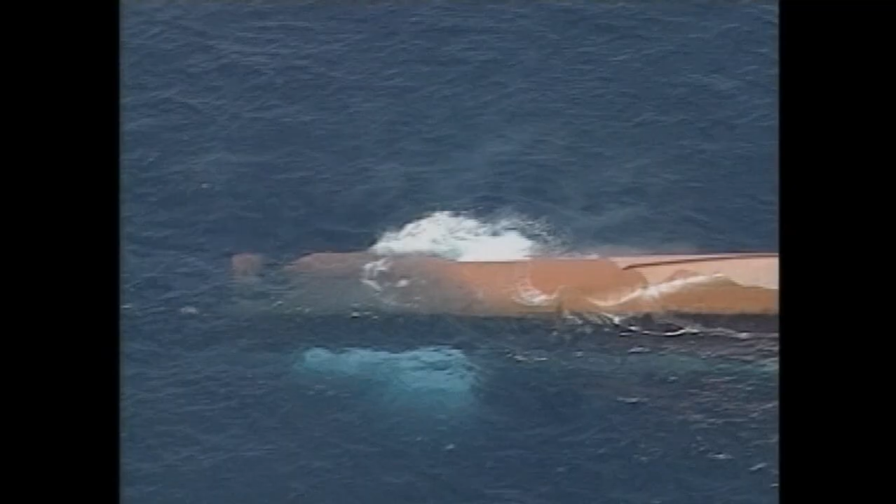The ship handling techniques that we are to study here are also available in the International Maritime Organization Circular Guidance to the Masters for Avoiding Dangerous Situations in Following and Quartering Seas.

According to the guidance, risks in following and quartering seas may arise when a ship is sailing in the same direction and at the same speed as the problem waves.

Let's take a close look at the effects of these seas upon a ship's stability. The situations that should be most carefully monitored in following and quartering seas, when the ship is traveling in the same direction and at the same speed as the problem waves, are the encounter wave grouping phenomena, parametric rolling, the reduction of stability, and the broaching to phenomenon.

These four serial phenomena are the characteristics of encounter wave grouping phenomena. First, let's take a look at encounter wave grouping phenomena.

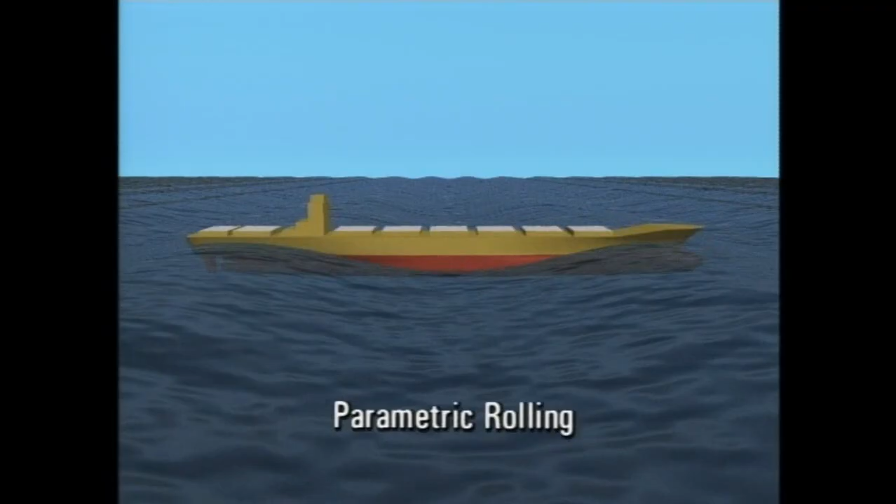However, when parametric rolling occurs, a ship rolls to the starboard side on the first crest and to the port side on the following crest, which means that one rolling cycle is completed for every 2 wave cycles. Consequently, the amplitude of the ship's roll is gradually magnified.

To understand this more easily, let us compare ordinary rolling and parametric rolling. When you look at these motions more closely, you will notice that the ship rolls only once for every 2 cycles of passing waves, while the ship pitches once synchronous to the cycle of passing waves. This type of rolling is magnified when the encounter wave period reaches half of the ship's natural rolling period.

This means that as GM decreases, the probability of parametric rolling increases.

In order to avoid parametric rolling, it is necessary to adjust the encounter wave period so that it does not coincide with 1/2 of the natural rolling period of the ship.

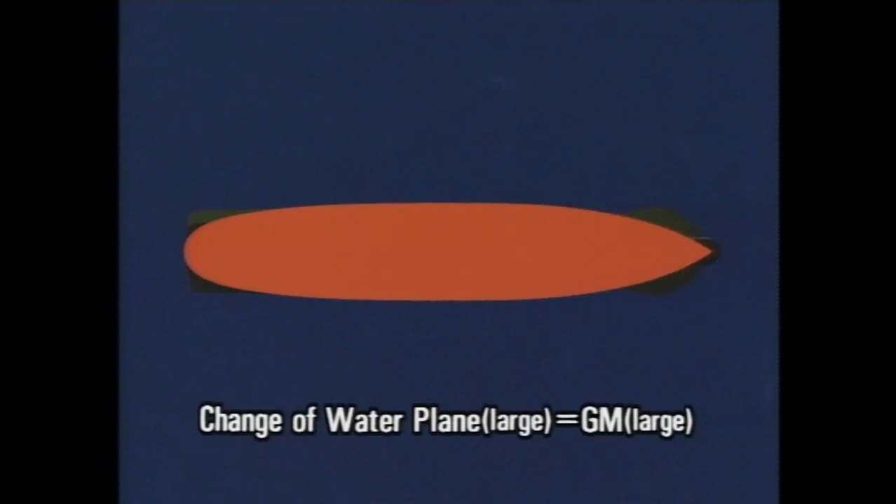Even if a ship is in a situation with reduced stability, the time span the ship might endure this will be shorter when sailing in counterseas. Conversely, the possibility of risk is increased in following and quartering seas, as the time span is greatly increased.

To avoid the risk of capsizing due to a reduction of stability, you need to have your ship sail clear of this dangerous zone to minimize the chances of riding on the crests of waves for a prolonged period. For this purpose, you also need to reduce the ship's speed or alter course, or do both, to change the encounter wave angle.

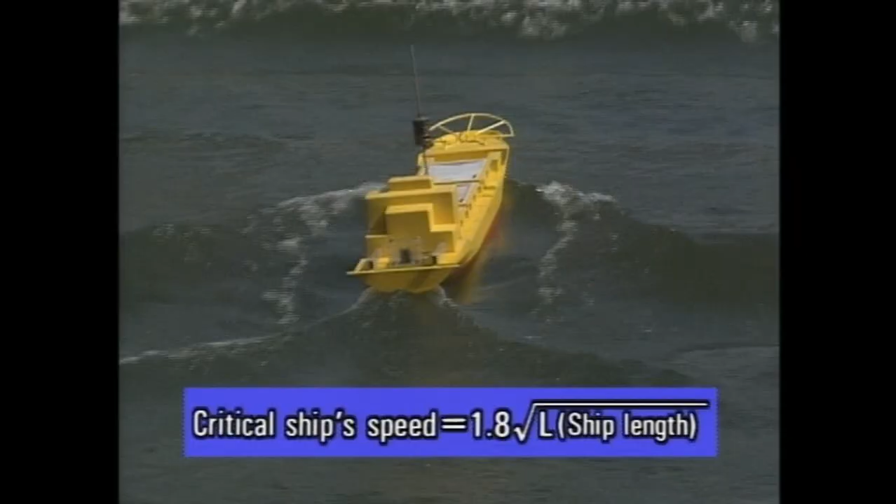To avoid surf riding, you should know the critical ship speed that causes this phenomenon. The critical speed that causes surf riding is considered to be 1.8 multiplied by root L. Therefore, you should reduce the ship's speed to less than 1.8 multiplied by root L.

In addition, even before reaching the surf riding condition, to avoid large surgings likely to induce the broaching to condition, it's necessary to reduce the ship's speed to less than 1.4 multiplied by root L. The formulae shown here are also cited as the criteria for avoiding broaching to in the guidance adopted by the IMO.

However, when a ship is sailing in shallow waters, a surf riding phenomenon can be caused even when a ship is sailing at a comparatively low speed. This should be borne in mind, in particular by seafarers operating high-speed pleasure boats and fishing vessels.

To prevent encounter wave grouping phenomena, it's necessary to take care so that any combination of important factors, such as encounter wave angle, ship speed and wave period, do not fall in the danger zone.

To prevent parametric rolling, it's necessary to take care so that the encounter wave period to the ship's natural rolling period ratio does not fall to half.

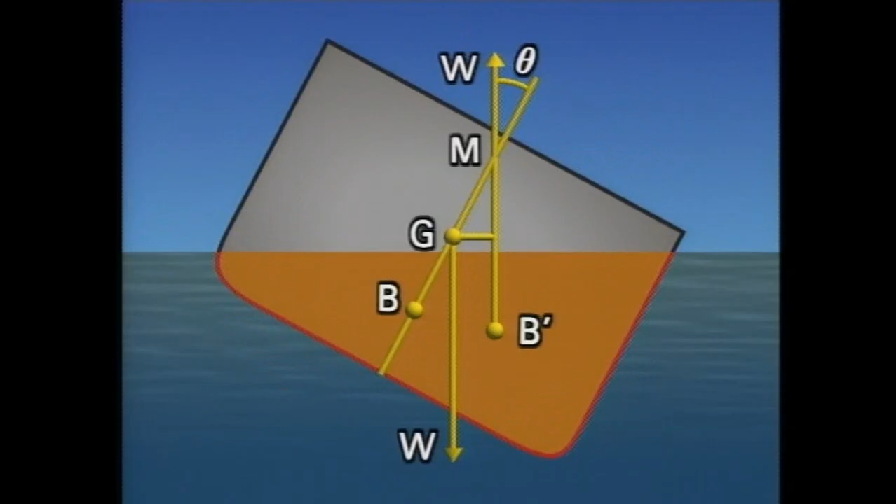To prevent surf riding and broaching to, it's necessary to be aware of the critical speed leading to surf riding conditions. In addition, take special precautions to prevent these phenomena when a ship is sailing in shallow waters. For seafarers operating pleasure boats, high-speed fishing vessels, small and medium-sized ships, this should be particularly borne in mind.

We hope this video helps to promote safe ship operations by reminding you to observe the basic ship handling requirements and by providing you with sufficient knowledge on the dangers of sailing in following and quartering seas.

When a ship navigates in head seas, its hull is subjected to severe shocks which induce violent ship motions. As well-trained and experienced navigators, we are able to respond to this by altering the ship's course and speed as required.

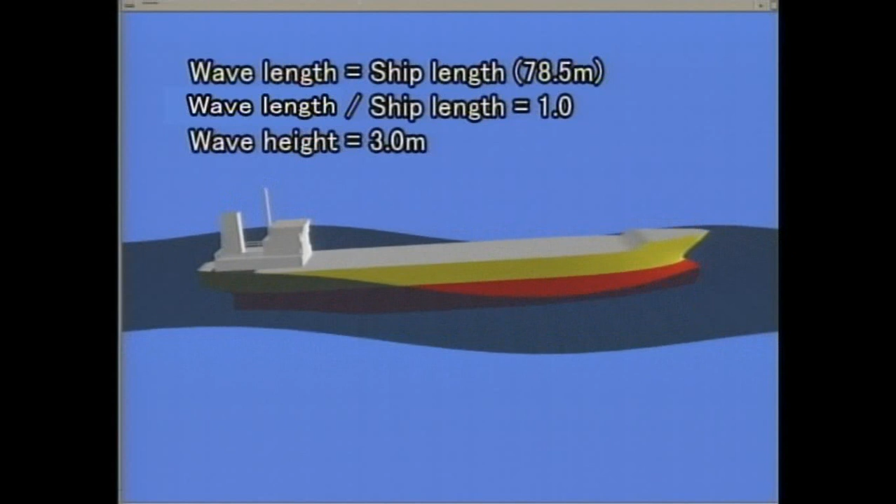When wavelength is equal to ship length, ship motions will be most intense. The heaving of the ship on a crest and the plunging of the bow into the succeeding wave will be accelerated. In such cases, changes of water level both forward and aft become particularly great in regular waves, and this causes propeller racing, shipping seas, and slamming phenomena.

Whenever a ship pitches and heaves heavily at the bow, an equivalent heaving motion is generated at the stern. Due to these motions, the stern lifts out of the sea at intervals, exposing part of the propeller and causing instant increases of propeller revolutions accompanied by intense vibrations due to the abrupt reduction of propeller load. This phenomenon is called propeller racing and can have adverse effects not only on the propeller itself but also on the propeller shaft and engine.

Therefore, we should make the stern draft as deep as possible so that the propeller immersion will be kept at more than 20% of the diameter of the propeller when navigating in rough seas.

As resistance to the hull increases, the ship sometimes plows through the water under excess engine load. This causes what is called a torque-rich effect, and may often result in engine trouble due to overheating or in great waste of fuel. In such conditions, it's essential to reduce ship speed.

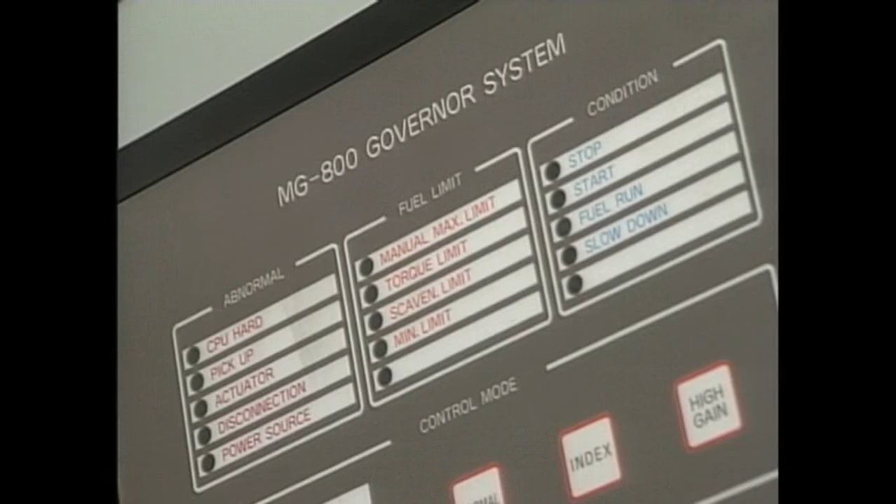Shipping seas is a condition in which a mass of green sea sweeps over the decks beyond the forecastle bulwark. A ship may sometimes suffer severe damage from the impacting green seas.

Deck machinery, deck cargo and hatch covers are often damaged by the seas thus shipped, and hatch cover damage can allow the entry of water into the holds.

These assaults by green seas have two effects: direct dynamic pressure from the shipped masses of green sea, and the ensuing damage caused by the impact of sweeping waves against deck machinery and appliances.

The dynamic pressure of green sea pounding on deck vertically may reach about twice that of shipped green seas. Furthermore, the dynamic stress of a sweeping mass of shipped seas over decks, increasing in proportion to the power of 2 of ship speed, becomes almost as great as that from vertical pounding.

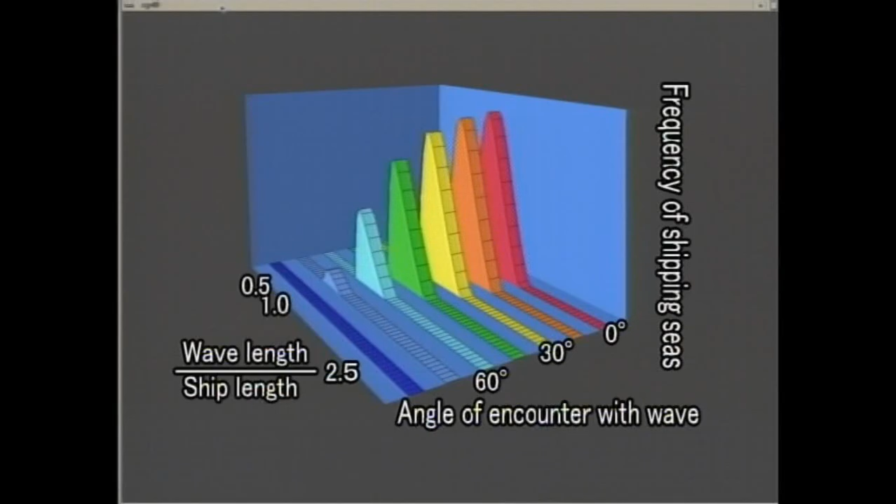As you have seen, shipping seas becomes more frequent when wavelength is equal to ship length in head and countering seas. We can decrease the chances of shipping seas by reducing speed or altering course.

Next, let's study the phenomena associated with shipping seas when there are irregular waves. Waves usually encountered in the ocean are a complex mixture with different lengths and heights.

Let's start the trial. In this case, the ship travels at a speed of 9 knots in head seas with an average wave period of 7.13 seconds and a wave height of 3.7 meters. Under these conditions, the action of the seas being shipped is violent.

Let's change the angle of encounter of the ship to waves to 60 degrees, while leaving the other factors unchanged. Under this condition, rolling increases, but no seas are shipped.

In summing up the results of these trials, it's clear that the frequency of seas being shipped increases in proportion to ship speed.

When a ship sails at a relatively high speed in head seas, slamming may occur. Slamming can be broken down into 3 categories.

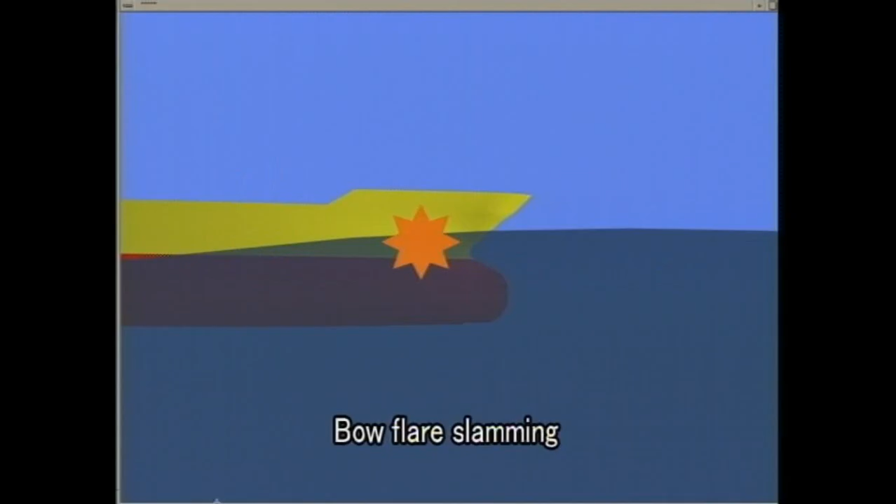Bow breaking wave impact is caused by breaking waves superimposed on built-up waves at the bow of a large, full-hull type ship in head seas.

These forms of slamming phenomena often not only cause structural damage to bow, bottom or bow flare, but also lead to major cargo damage.

As the frequency of slamming increases, there is the chance of cracks developing in the hull structure and of metal fatigue due to repeated stresses and strains, sometimes leading to a major casualty with a total collapse of the hull.

Here, in a model ship trial, we study what conditions cause slamming to be generated.

It appears that the frequency of slamming increases in proportion to ship speed. In addition, it's also clearly indicated that the frequency of slamming increases when forward draft is reduced. From this table, it's possible to calculate the necessary speed reduction to decrease the frequency of slamming by half.

Propeller racing, shipping seas on decks, or slamming may be generated when a ship navigates at a relatively high speed in head seas. We have studied the frequencies of shipping seas and slamming on various types of ship based on the correlation between ship speed and encounter angle of the ship to waves.

To avoid any critical situation, it's essential for the navigator to handle his ship by adjusting speed optimally based on correct knowledge of these environmental conditions, while taking his own ship's stability and maneuverability into consideration. A navigator's primary responsibility is to operate his ship safely in harmony with natural wind and wave conditions.

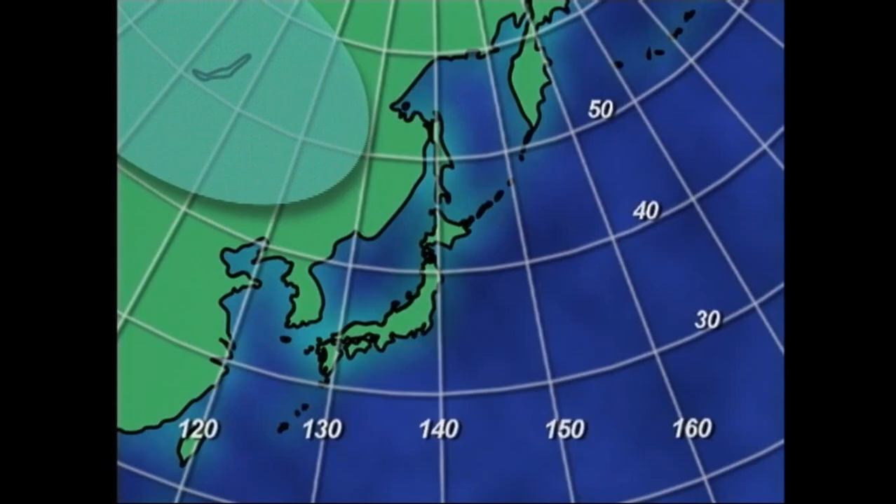The generation and development of an extratropical cyclone are greatly affected by air masses in the near-sea areas of Japan. There are two air masses affecting the meteorological condition in the near-sea areas of Japan. One is the Siberian air mass, a cold air mass. The other is the North Pacific air mass, a warm air mass. Depending on seasons, the Okhotsk air mass and the Yangtze air mass are also affected.

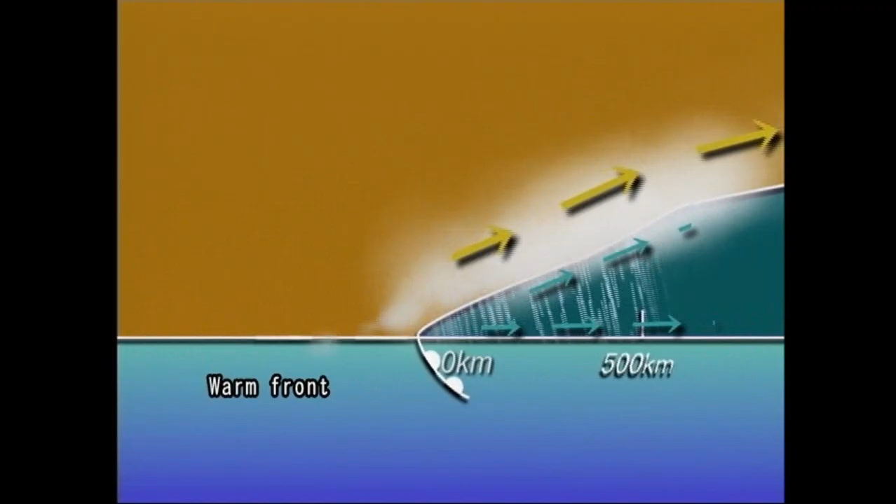When air masses with physically different characteristics come into contact with each other, fronts are created in the frontal boundary zone. When a warm air mass is predominant, it moves towards the cold air mass and pushes the front forward, with the lighter warm air creeping up the frontal boundary of the cold air mass. A front formed in this manner is called a warm front.

Conversely, when a cold air mass is predominant, it moves towards a warm air mass, and the cold air mass moves the frontal boundary forward, raising the lighter warm air mass. A front formed in this manner is called a cold front. An extratropical cyclone generates on this front.

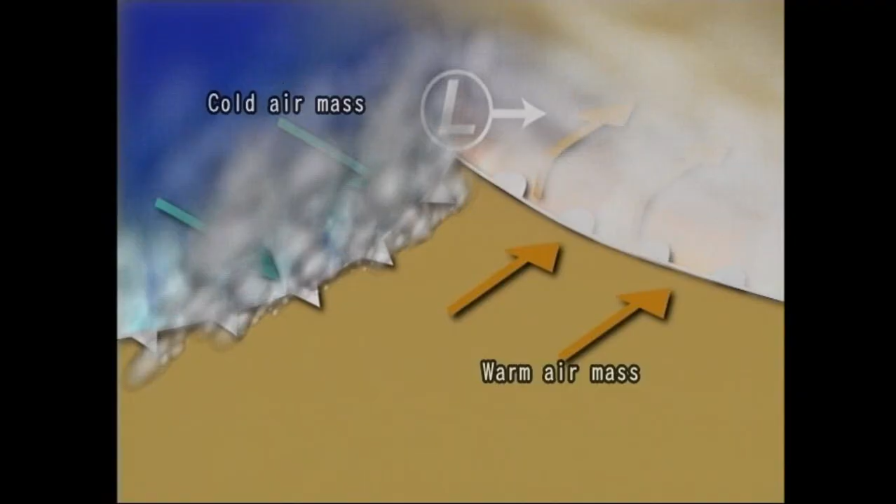If the warm air mass in the south of the front moves northward, and the cold air mass in the north of the front moves southward, an updraft occurs due to the contact between warm and cold air masses. This generates a counterclockwise spiral flow of air, growing into an extratropical cyclone.

The larger the difference in temperatures between the two air masses in the north and south, the larger the extratropical cyclone. For these reasons, larger extratropical cyclones develop in winter than in summer. Extratropical cyclones generally move northeast, approximately at a speed of 40 kilometers an hour, and 10 degrees in longitude a day.

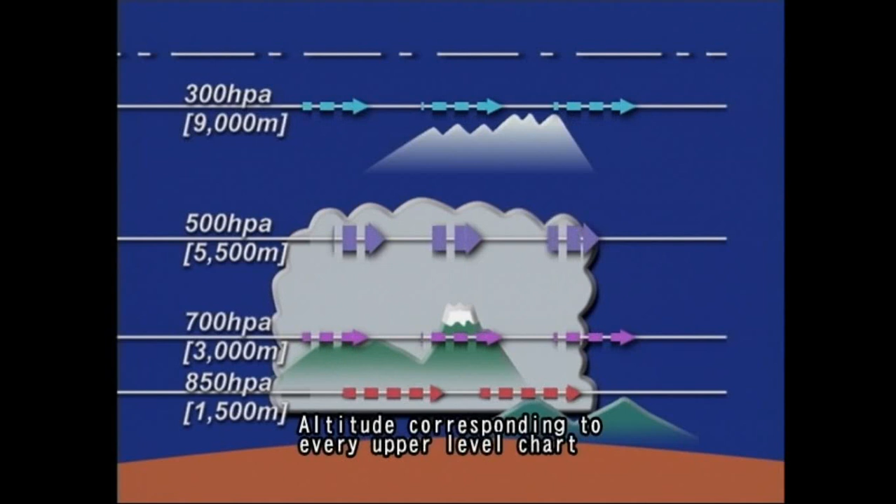Ships mainly refer to 500 hectopascal upper level charts. This is because levels of 500 hectopascals correspond to approximately half the average height of the troposphere, and its atmospheric pressure is about half that of the ground surface.

These extratropical cyclones tend to generate in front of a trough in the upper level. When a trough deepens from the day before, a low develops on the surface below.

We also need to keep an eye on the movements of upper-level isotherms, because movements of upper-level cold air towards the south may cause extratropical cyclones to develop associated with gusts. Special attention should be paid to the movements of isotherms on 500 hectopascal upper-level charts: minus 30 degrees centigrade and minus 36 degrees centigrade in winter, and minus 24 degrees centigrade in spring and autumn.

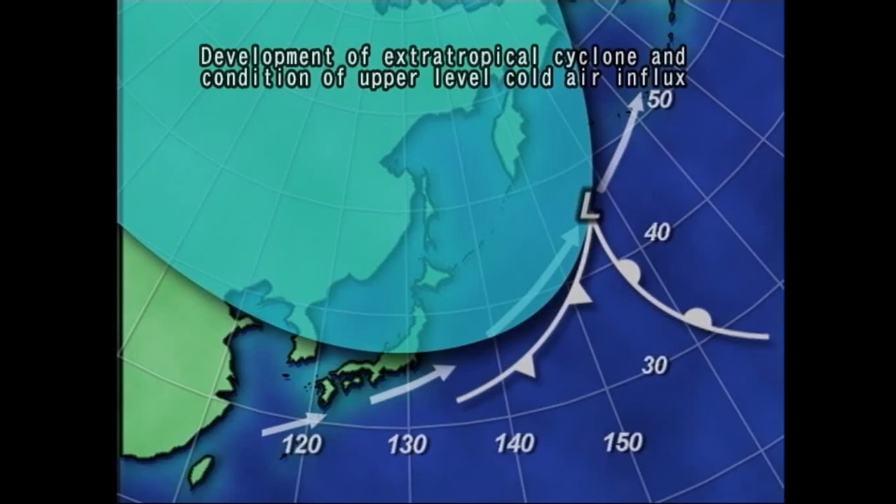As already explained, it's recommended that navigators should use upper-level and surface charts in an optimum combination.

Lows generated in a tropical zone are called tropical depressions. In Japan, a tropical depression with a maximum wind speed of 17.2 meters per second or more is called a typhoon.

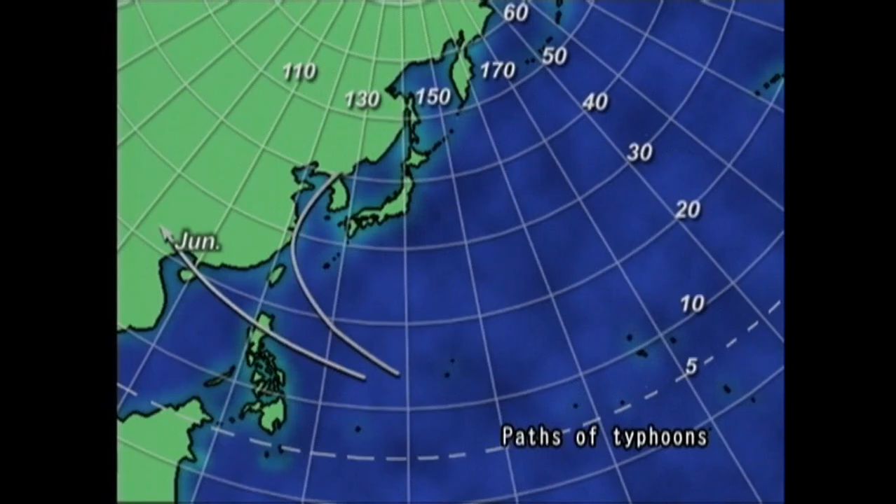Paths of typhoons generally come in two types: those traveling northwest after birth, and those recurving rightwards along the western fringe of the North Pacific Ocean high, then traveling northeast, influenced by westerlies. The path of the right-turn type is largely dependent on the strength of westerlies and the North Pacific Ocean high.

Most typhoons at first tend to advance west, bearing on the North Pacific Ocean high in the 500 hectopascal upper-level chart at its right side, along the 5,820 meter or 5,860 meter contour. Recurving points of typhoons may vary corresponding to the pattern of the ridge of atmospheric pressure of the North Pacific high extending east to west.

Let's take a look at a few days of movements of one typical developing extratropical cyclone in the near-sea areas of Japan in detail, referring to related surface charts.

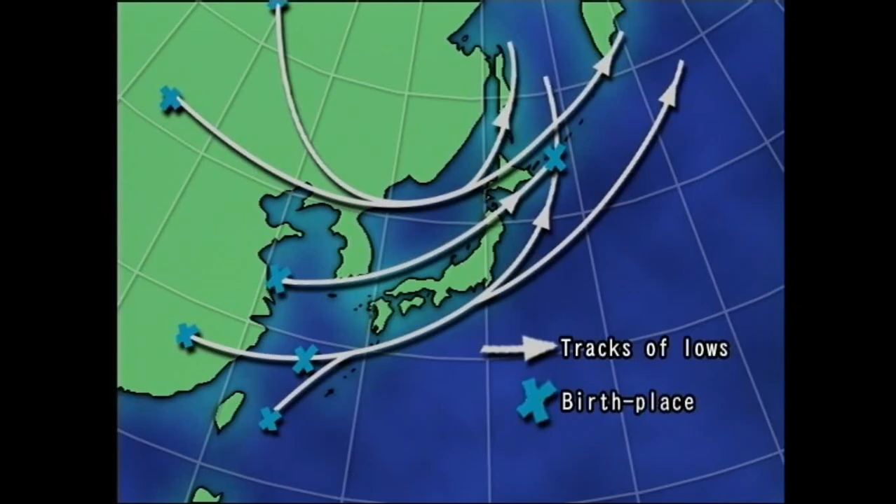In the near-sea areas of Japan, many extratropical lows generate from autumn to spring, and sometimes they develop to levels comparable to typhoons. They are categorized into three patterns corresponding to their origins and ensuing tracks: East China Sea lows, Japan Sea lows, and twin lows.

After the low has moved east under the influence of these three weather phenomena, a typical pressure pattern of highs in the west and lows in the east is often established. Let's take a look at such a typical pressure configuration.

A typical winter pressure configuration of highs in the west and lows in the east, as shown in this surface chart, appears from November to March. When the continental high extends to cover Japan and a developed low exists in the northeast area of Japan in the North Pacific, the winter monsoon grows stronger and lasts longer.

In the areas east of Nojimasaki of Japan, marine casualties involving large ships have often occurred due to high waves caused by the winter monsoon, which lasts for a long time with long fetches over the sea surface.

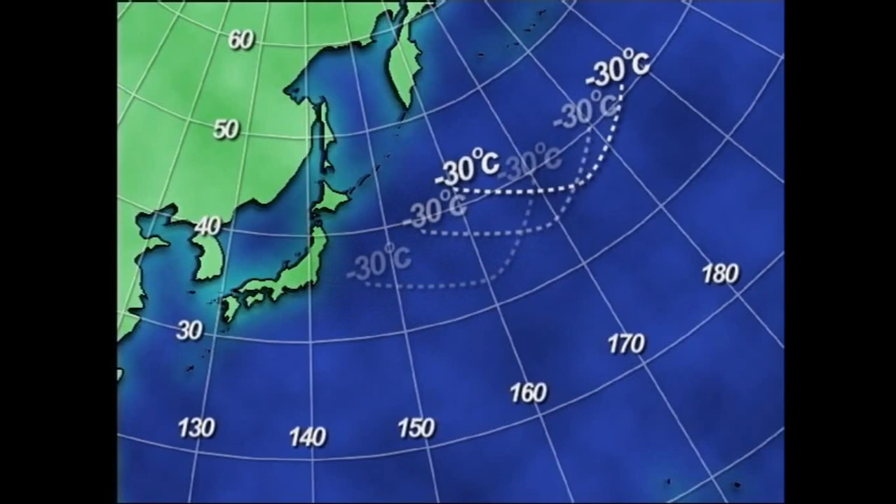This is why unusually high waves generate over a wide area. This high wave area extends 30 to 37 degrees north in latitude and 140 to 160 degrees east in longitude.

As this high wave area appears in the southwest quadrant, far from the center of the low, it's necessary to know the movements of upper layer cold air from the isotherms of 500 hectopascal upper level charts.

It's necessary to know the relative position of a ship to the subject tropical depression or typhoon to minimize its effects.

When a typhoon is moving north and wind direction observed on board changes clockwise, the ship is in the right semicircle of a typhoon. In contrast, if the wind direction changes counterclockwise, the ship is in the left semicircle of a typhoon.

The rate of change of wind direction is larger when the distance between the ship and the typhoon is smaller. Conversely, the change becomes smaller when the distance increases. A large change foretells abrupt and drastic directional change of wind direction.

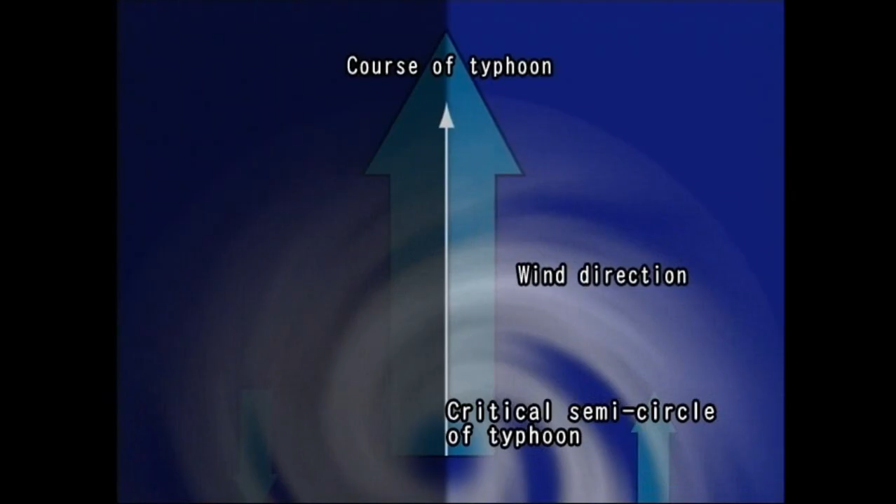The semicircle to the right of the center line of the typhoon's path is called the critical semicircle, where the original winds of the typhoon are enhanced by the same directional prime mover air current. If a ship is in this semicircle, it will endure a pressing wind towards the center.

On the other hand, the left semicircle of the advancing path of the typhoon is called a navigable semicircle because typhoon winds are weakened by the adverse prime mover current of the typhoon. When a ship is in the left semicircle, the wind presses the ship behind the typhoon. Nonetheless, even in a navigable semicircle, as it accompanies a storm area, proper caution is necessary.

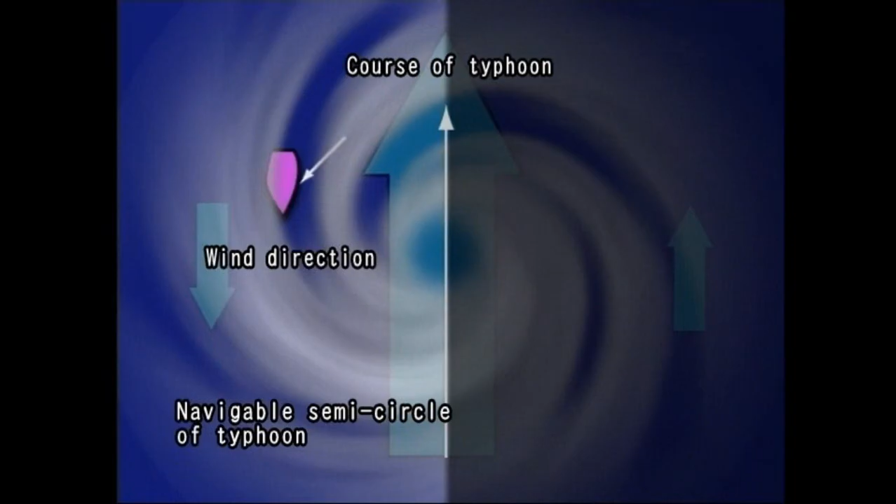Therefore, it is advised that the course is maintained to keep the wind at the starboard bow when in a critical semicircle, and at the starboard quarter when in the left semicircle, to turn away from the typhoon.

Today, we can easily receive various maritime meteorological information such as surface charts, upper-level charts, ocean wave charts, and photos taken by meteorological satellites broadcast by the Meteorological Agency.

It's important for seafarers not only to endeavour to acquire the necessary knowledge to make best use of this information, but also to have safe and cost-effective shipping operations.

Narrow passages and fairways in rivers and canals, where the navigable depth or width is comparatively small in relation to the draft and the breadth of transiting ships, are called restricted waters.

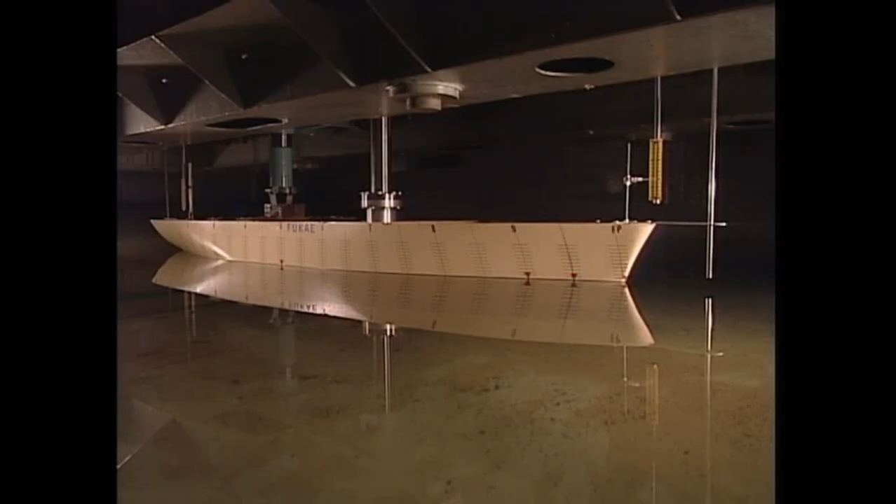The Froude number is an essential concept for a model tank test. To run a model at a speed corresponding exactly to that of a real ship, a ship speed is applied using this equation, which gives the same Froude number to different model lengths and the comparable real ships.

Here you see a ship in a tank test. Let's take a look at the sinkage of the ship at her bow and stern. Let's also look at the subsequent trim change running in deep water by using a ship model in a tank test. This is the bow of a fully loaded small ship running in deep water, where the ratio of the depth to the ship's draft is 5.0 at 11 knots.

This shows the condition of the stern of the same ship running at 11 knots.

This is the bow condition when the ship's speed is increased to 13 knots. This shows the condition of the stern of the same ship at a ship speed of 13 knots.

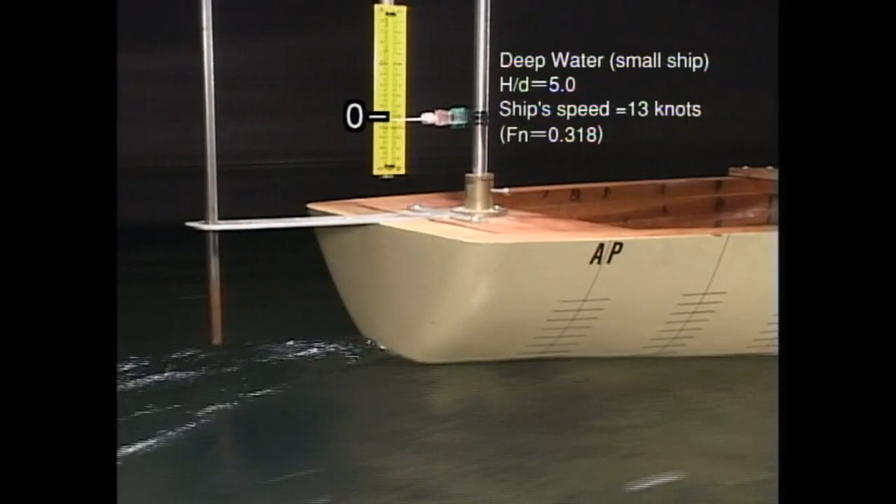However, the sinkage at the stern of a merchant ship under normal speed is generally very small. By contrast, the sinkage at the bow appears larger compared with that at the stern. As you see here, a ship underway tends to show trim by the head.

This is the stern condition at a speed of 9 knots. This is the bow condition when speed is increased to 10 knots without changing any other conditions. This is the stern condition at a speed of 10 knots. As you can see, the sinkage appears larger at both bow and stern in shallow water.

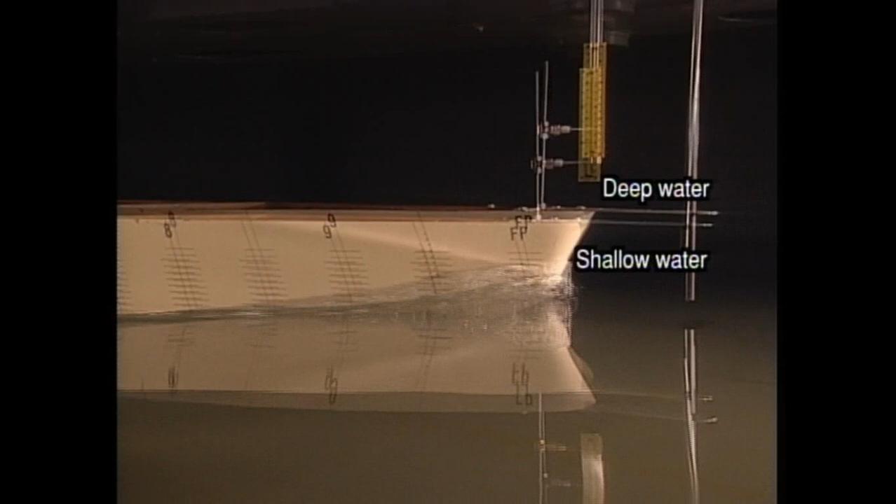Now we shall see how sinkage changes depending on the speed when a ship proceeds in shallow water. For ship speed with a corresponding Froude number less than 0.25, sinkage at the bow is greater than that at the stern as the Froude number increases. However, sinkage at the bow stops suddenly, and that at the stern finally increases when changing trim by the stern as the Froude number approaches 0.25, which is close to the values in high-speed areas.

We shall see this effect in shallow water and that in deep water. Sinkage at the bow in shallow water, which reaches 2% of the length of a ship, is larger than that in deep water.

So, why do these phenomena happen?

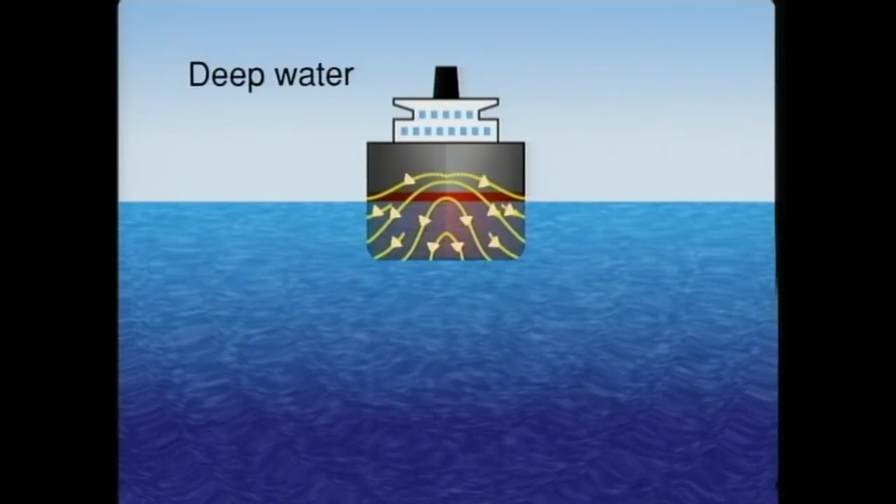In shallow water, where the bottom clearance is comparatively small, the ratio of the horizontal flow along both sides of the ship increases because the current towards the bottom is restricted. The hydraulic pressure along both sides of the hull decreases, as the nearer the hull is to the surface flow, the faster the rate accelerates, and the water level around the ship drops considerably. For this reason, sinkage at the bow and stern and subsequent trim change become larger in shallow water than in deep water.

We should be careful that sinkage at the bow and change of trim become greater when a ship runs in shallow water.

Now we shall see how the depth of water affects a ship's turning capability in shallow water. Let's take a look at the data of the turning capabilities of large ships. Every curve indicates the tactical diameter of a specific ship by the multiples of the ship's length.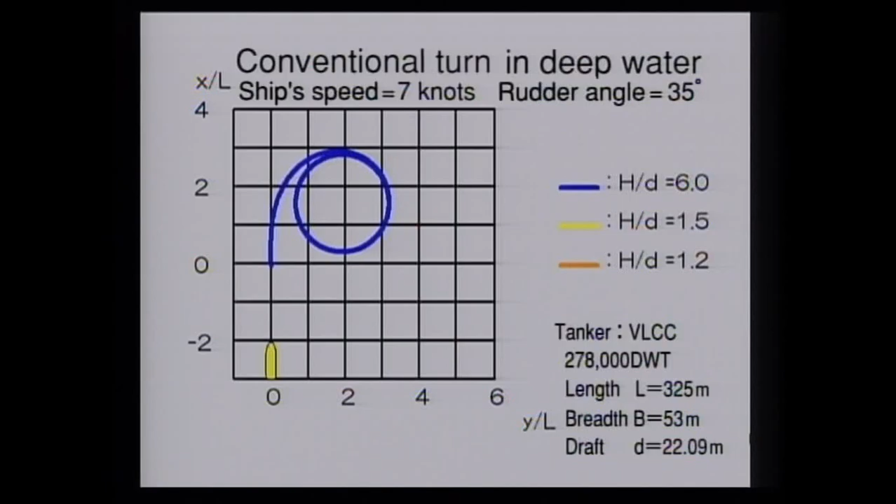This is a ship turning in shallow water, where the ratio of water depth to draft is changed to 1.5, while the other conditions remained unchanged.

This is when the ratio of water depth to draft is changed to 1.2 without changing any other conditions.

Now we shall see how the turning track differs as the depth of water changes. When the ratio of water depth to draft is 6.0, the turning tracks are as seen here. This is a conventional turn. Here is an accelerating turn. This is a coasting turn.

When the ratio of water depth to draft is 1.5, the turning tracks are as seen here. This is a conventional turn, here is an accelerating turn, and this is a coasting turn.

When the ratio of water depth to draft is 1.2, the turning tracks are as seen here. This is a conventional turn, here is an accelerating turn, and this is a coasting turn.

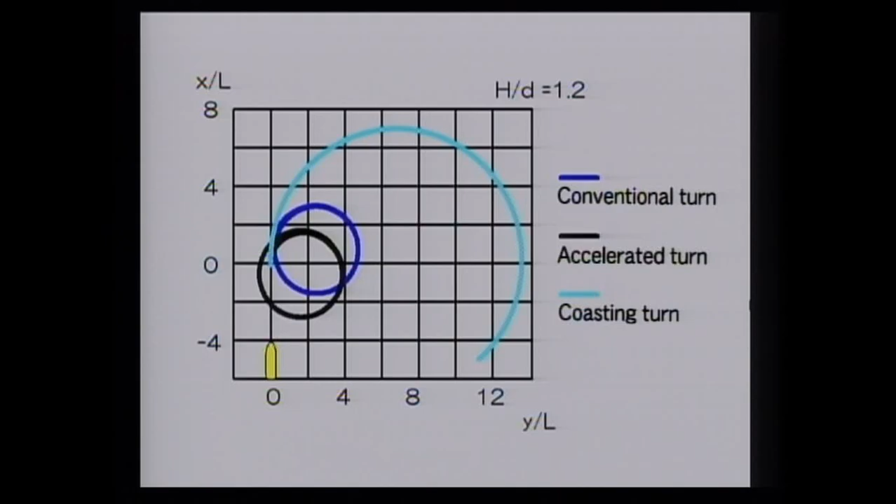Thus, we can estimate the tactical diameter of a ship running in restricted water as the multiples of its length. Although the presented data hitherto are taken from the test results of large ships, this method can also be applied to smaller ships.

In view of the maneuverability of a ship, the depth of water also affects course stability, like the effects on turning ability. We shall study the difference of the effects on course stability in deep water and in shallow water from the results of zigzag maneuver tests.

In the zigzag maneuver test, a ship's rudder starts to swing alternately to port and starboard when the ship is set on a steady straight course. At first, the rudder is put to starboard 10 degrees until her head swings starboard 10 degrees from her original course. Immediately after the ship's head swings 10 degrees starboard, the rudder is changed to port 10 degrees until her head points 10 degrees port from her original course. These alternate rudder operations are repeated several times, making a ship run in a zigzag course.

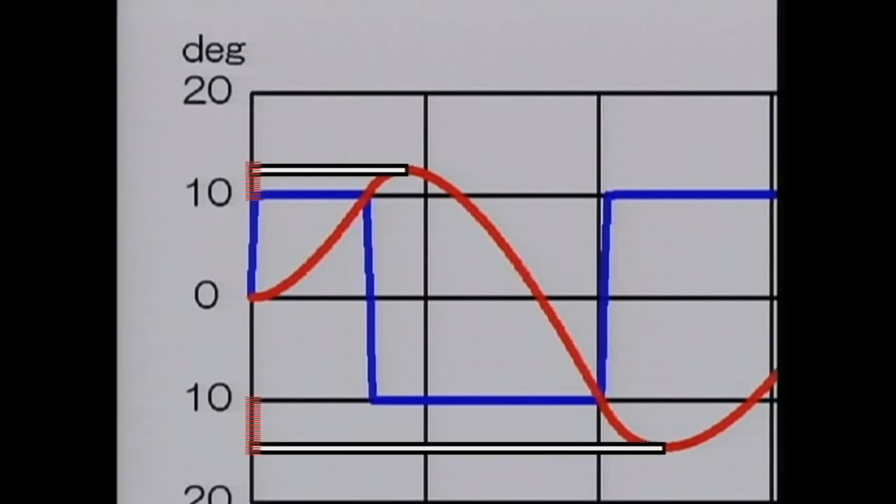Here you see the results of Z tests conducted in deep and shallow water. As you see, the required time to turn a ship's head port or starboard to a settled angle in shallow water becomes shorter with a smaller overshoot angle than that in deep water. This means that we can expect quicker rudder effect in shallow water compared to that in deep water.

A well-remembered case among several cases reported in the past is that of a large passenger ship navigating in shallow water without reducing her speed that hit her bottom severely on the rocks. When running in restricted water, it's essential to keep enough under-keel clearance to avoid the deterioration of maneuverability and touch-bottom damage.

Under-keel clearance means the space between the ship's bottom and the seabed. It equals the value when the ship's draft is subtracted from the sum of chart datum and height of tide at that time.

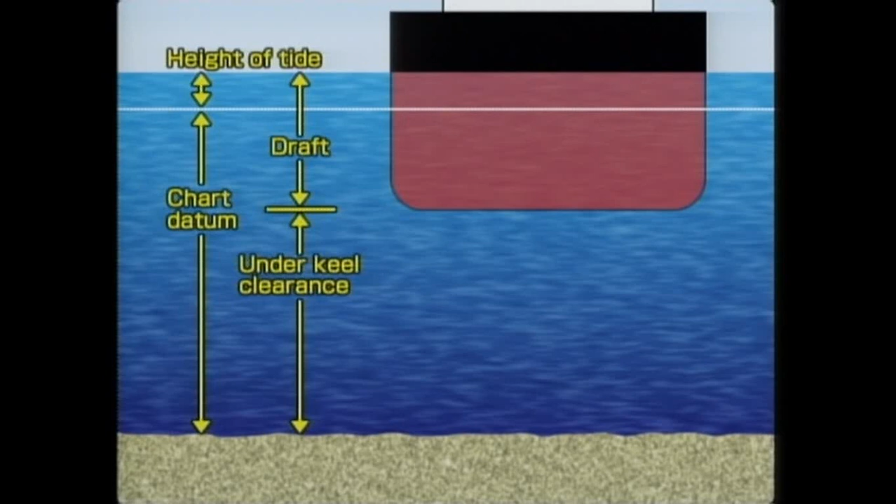To maintain enough under-keel clearance, we have to consider the factors affecting the sinkage of the hull, such as squat allowance, wave response allowance, possible error of chart datum, meteorological and oceanographic conditions, and other environmental conditions, and secure a safety allowance that eliminates ship handling difficulties.

As we have studied in this video, the effects of sinkage and change of trim when a ship navigates in shallow water greatly affect the ship's maneuverability. Enough knowledge of these effects in restricted waters will prevent accidents.

In January 1934, the British battleship Nelson left Portsmouth for the open sea at 9 knots and went aground on a starboard shoal in a narrow channel due to the unexpected ship's response of swinging her head to starboard, despite the helm being turned to port 15 degrees for the intended course. The reason for this grounding was a typical bank effect.

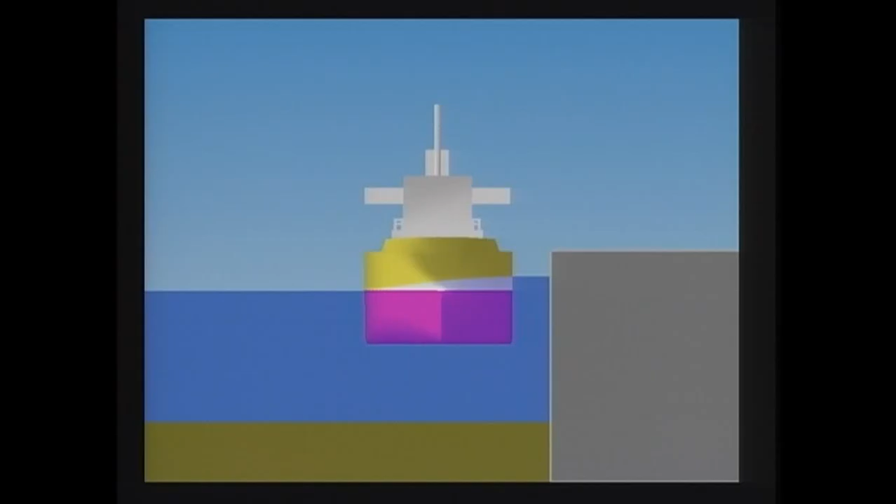The bank effect is a phenomenon that causes a bow outward moment and attracts the ship's hull as a whole to the bank due to decreased pressure at the midship area. This attracting force is called suction.

Ship handling becomes very tricky due to the deterioration of course stability caused by the bank effect when a ship navigates a narrow channel, as we've illustrated. How should we handle a ship under such conditions?

To have a ship run in a straight line on its intended course by offsetting suction and bow outward moment caused by the bank effect, the ship's head has to be kept obliquely to its intended course. As a result of this oblique posture to the advancing direction, extra force and turning moment will be generated on the hull. This extra force will offset suction to the bank.

However, to offset bow outward moment, a checking rudder motion toward the bank is still required. This means that the turning moment and the force produced by the proper angle of checking rudder can offset the forces and turning moments generated by bank effect and oblique posture.

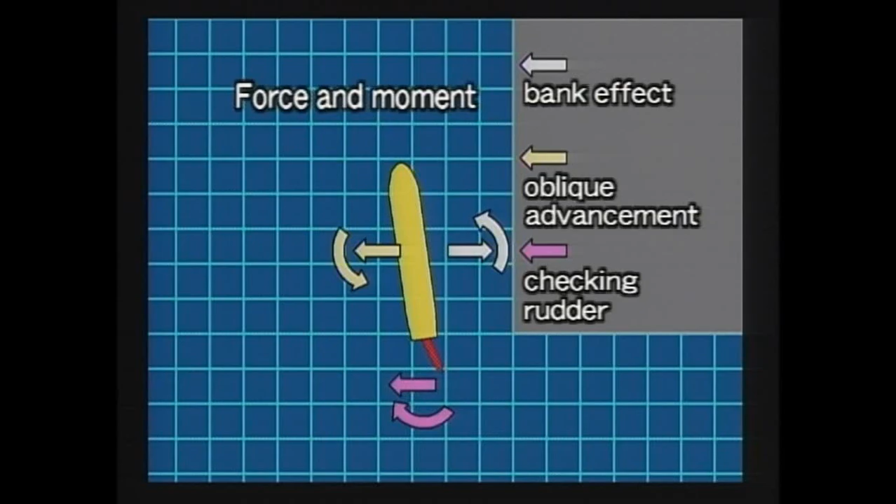To prevent contact with the bank at the stern, it is necessary for a ship to steer toward the bank. The ship can then maintain a parallel track to the bank.

When there are multiple ships passing by, running abreast or overtaking in a narrow channel, the interaction between two ships moving in close proximity will sometimes have a grave effect on those ships. The effect of the interaction varies depending on the relative positions of the two ships.

First, we look at the case of two ships of almost the same size passing each other. When the bows of the two ships come closer within the mutual hydrodynamic range, a strong repulsive force at the midships and bow outward moment are created.

Alternatively, strong suction at the midships and bow inward moment are produced between two ships when they come abeam of each other.

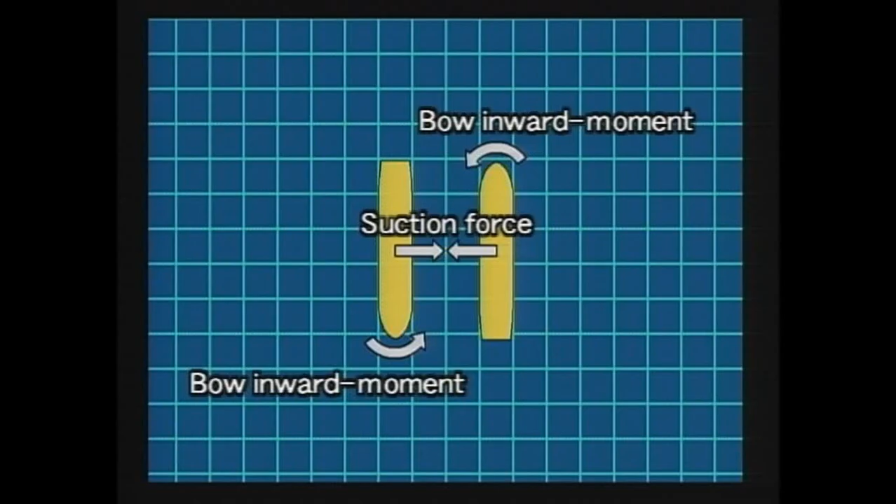When the sterns of the two ships pass each other, these effects are transformed into repulsive force and bow inward moment.

These effects of extra force and moment fade away quickly as the distance between the two ships increases. The results comparing the effects of interaction at 4 knots with those at 6 knots demonstrate that the interaction between two ships passing becomes larger and persists proportionally to ship speed.

When two ships pass by in the opposite direction, a collision seldom happens because the influences of repulsion and suction last for a comparatively short time. However, it should be borne in mind that the risk of contact at the stern will increase if either of them should turn its rudder in the wrong direction inadvertently.

The interaction between two ships of almost the same size running abreast in the same direction or overtaking in a narrow channel also varies depending on their relative positions. In this case, the risks of rear-end collision and contact increase because the interaction between the two ships lasts for longer.

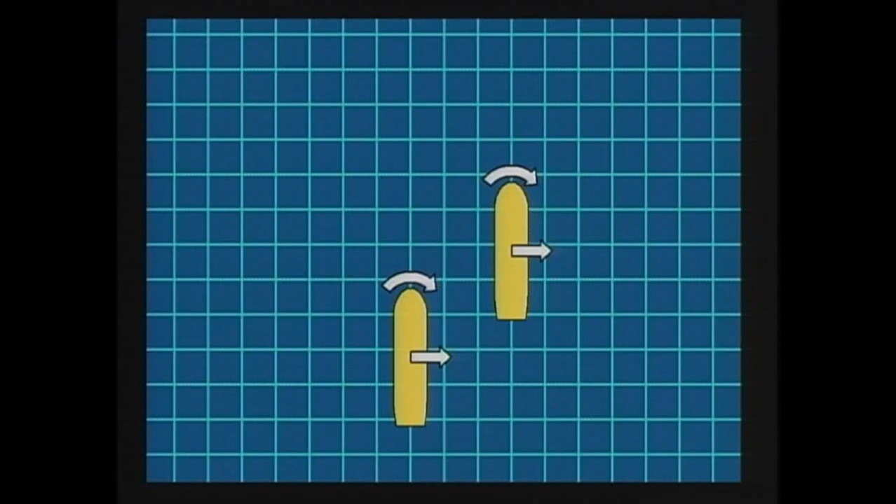When ship A advances 1/3 to 1/4 of its length from the stern of ship B in parallel, the effects change like this.

When two ships run abreast, strong suction at the midships and bow outward moments are generated between them.

The effects will be like this when the bow of ship A advances ahead of ship B, but 1/3 to 1/4 of their hulls remain parallel.

The effect will be like this when the stern of overtaking ship A comes abeam of the bow of ship B.

Let's look at how the interaction between two ships in close proximity and running in the same direction in a narrow channel affects the steerability of a ship through a simulation.

This is the case in which ship A overtakes ship B in a narrow straight channel with a width of 310 meters. The two ships are similar, and these figures represent the specifications of ship B. Ship A runs at 4.5 knots and ship B runs at 3 knots. The beam distance between the two ships is half of the ship length. The two ships are steered to maintain parallel courses.

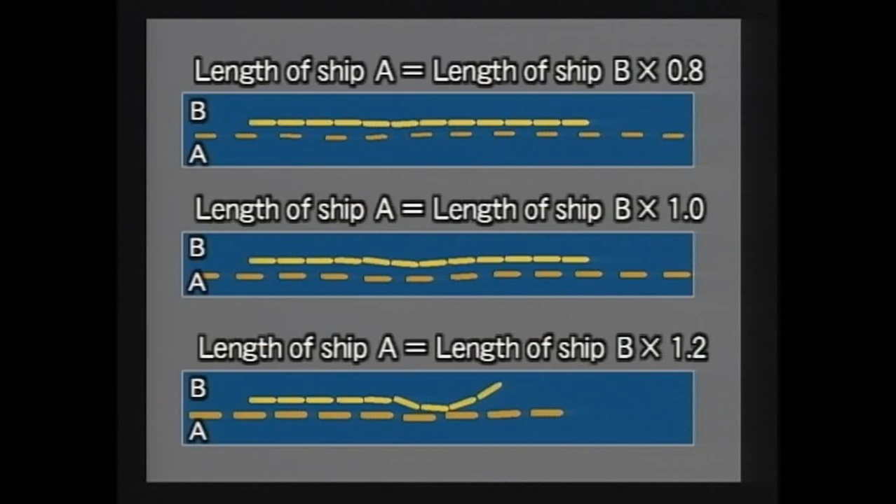Let's take a look at the effect of ship speed. In this case, the ratio of ship speed of overtaking ship A to that of overtaken ship B is 1.2, and the beam distance between them is half of the ship length. The two ships are steered to maintain parallel courses. The simulation is made by changing the speed of overtaking ship A, maintaining the speed of overtaken ship B at 3 knots.

You will find that the risk of collision increases as the difference between the speed of the overtaking ship and that of the overtaken ship decreases. This is because the time when the two ships run parallel in close proximity is prolonged, and the subsequent interference between the two ships lasts longer proportionally.

As you can see in the results of the simulation, there is a larger interference effect on an overtaken ship when the difference of speed of the two ships is small and the overtaking ship is larger than the overtaken ship. It becomes difficult for a ship to avoid a collision through its own steerability when this interference grows beyond its capacity.

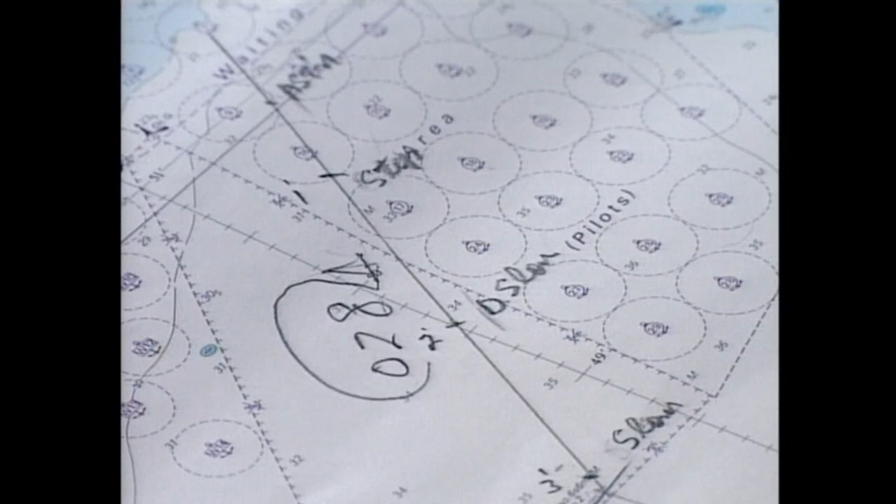A method of riding to a single anchor is the most frequent anchoring method. However, the anchoring method should be decided depending on weather and sea conditions, and necessary preparations are carried out according to the selected method.

The specifications of anchor and anchor cable to be stowed are decided by the equipment number of the ship. Each classification society also has its own requirements in compliance with this standard.

Today, the AC-14 type anchor appears to be the most widely used, but there are various other types of anchor available.

Let's look at the holding property of an anchor. The flukes of this type of anchor do not bite into the seabed as expected, and the anchor is easily overturned when stress is applied. What's more, once overturned, the anchor will never bite into the seabed again.

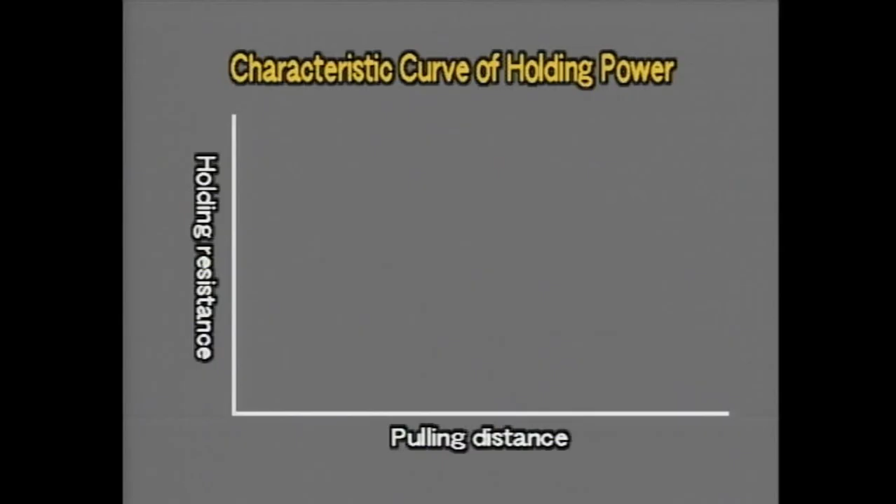This curve shows the results of anchor pulling tests. Holding resistance is the resistance created by the anchor when it is pulled. The maximum resistance is called holding power.

In addition to the holding power of the anchor itself, the effect of the cable paid out cannot be neglected. The total mooring power is the sum of the holding power of an anchor and the resistance of cable laid over the bottom.

Although the anchoring method varies depending on the depth of an anchorage, lying at a single anchor is most frequent because of its handling simplicity, either when dropping or weighing anchor. In this pattern, the anchor is usually let go under sternway.

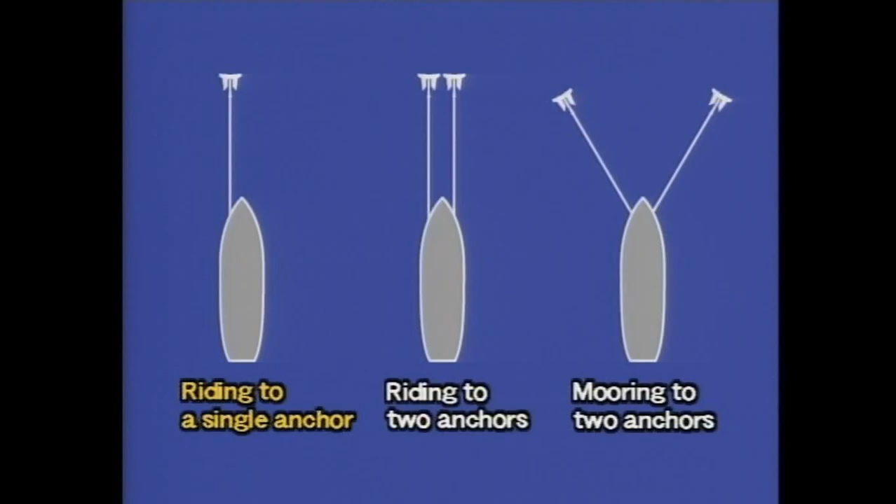First, we look at the procedure for lying at a single anchor in an area with depths to 20 meters. It is important for the running out chain to be checked by proper brake handling after the anchor is let go by free fall, releasing the brake.

Letting go the anchor and the cable without applying the brake properly increases the danger of losing the anchor with all of its cable and damage to the windlass.

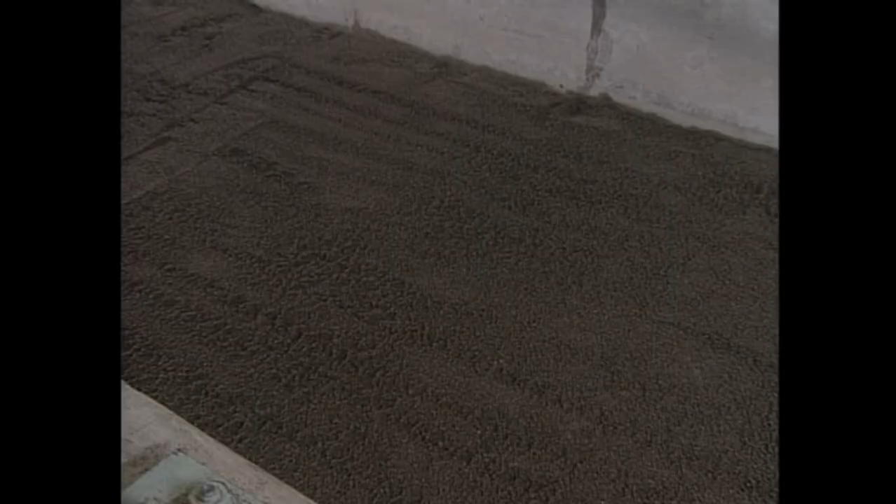Sternway just after letting go the anchor should be adjusted to 0.5 to 1 knot to avoid imposing excessive strain on the cable in large vessels. The brake should also be screwed up to stop the cable when the required shackles are sent out, and to have the anchor fluke bite into the seabed under sternway inertia.

Next, let's study anchoring at a deeper anchorage depth of from 20 meters to 50 meters. In a deep area, the possibility of loss of anchor and its cable becomes greater due to excessive running out speed if the anchor is let go by free fall.

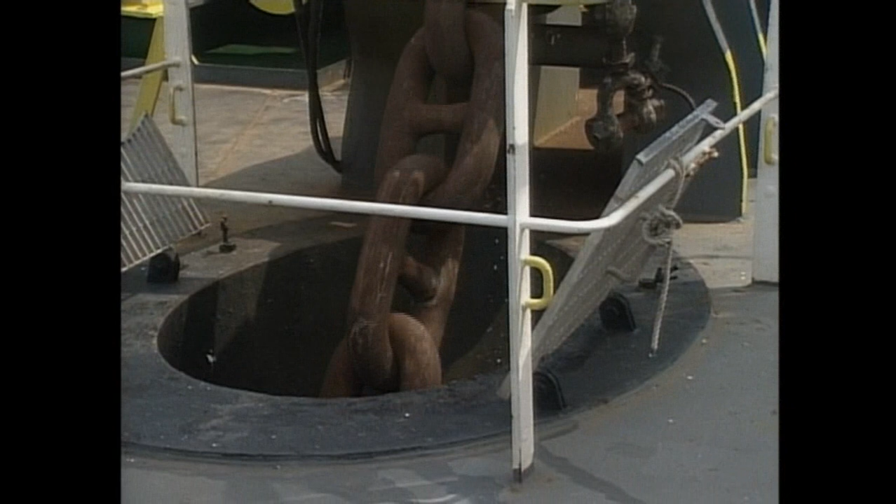To avoid this hazard, the anchor is lowered by walking back into the water until it reaches about 5 meters above the bottom. Then the brake is released to let go the anchor, while applying the brake to adjust the running out speed of the cable and carefully maintaining proper sternway.

When the depth of an anchorage exceeds 50 meters, the anchor and the whole cable required are laid down onto the seabed by the walkback method.

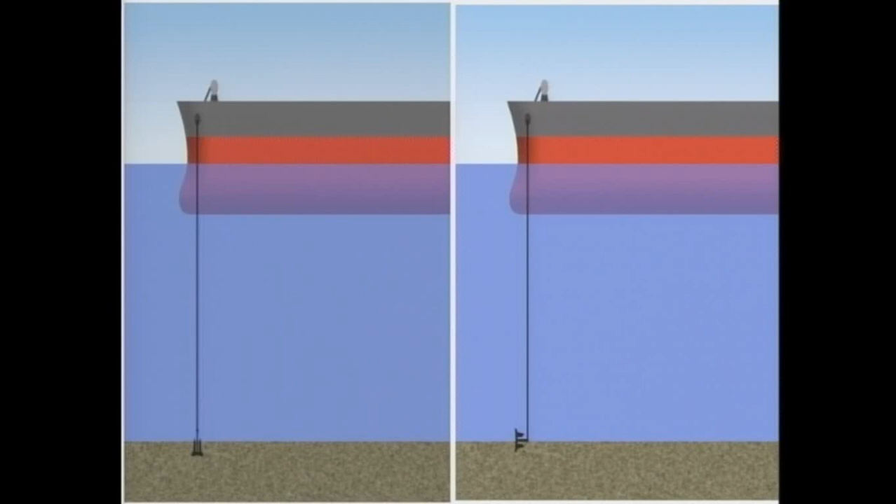In this case, sternway should be maintained under 0.5 knots once the anchor has touched the bottom, because too large a speed difference between sternway and walkback may cause parting of the anchor cable or damage to the windlass due to excessive strain in large vessels.

The limitation of depth for anchoring cannot be decided only from the total amount of anchor shackles, and is limited by the rated capacity of the windlass. Generally, a windlass is provided with a weighing capacity of up to 3 to 4 shackles of cable, or about 82 to 110 meters.

In an anchorage where the influence of winds and tideways are strong, there is a greater danger of dragging anchor due to excessive strain on the cable, or due to the reduction of holding power stemming from a meandering cable caused by the effects of winds and tideways.

Anchoring in wind at a wind speed exceeding 10 meters per second causes ship motions that draw a figure of 8 locus.

The maximum tension on the cable during this motion occurs when the ship drops back from its extreme yaw to the position where her fore and aft align the direction of the cable against the wind, or a little offset point.

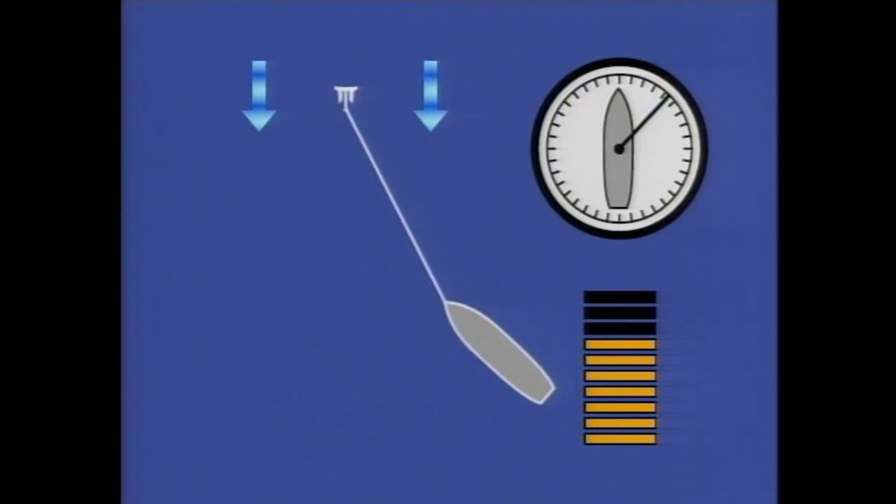This moment may be deduced from the change of relative direction of the wind on the navigation bridge.

The anchor drags when it loses its grip on the bottom and starts sliding over the bottom.

For a PCC or an LNG carrier with a large windage area lying at a single anchor, the critical wind speed is 15 meters per second. When the second anchor is dropped, the critical wind speed is 20 meters per second. And even when the ship is lying at 2 anchors, the critical wind speed is said to be 25 meters per second.

Once an anchor starts to drag, it is difficult to stop. Personnel assigned to anchor watch are required to pay close attention to a sudden change of weather and must report it immediately to the master. They should pay careful attention to weather forecasts.

A great advantage of anchoring is that ships can lie at anchor anywhere if there is sufficient room, sheltered from wind and sea, and provided with appropriate depths and good holding ground. Consequently, anchoring is the most convenient and common ship operation due to its simplicity and mobility.

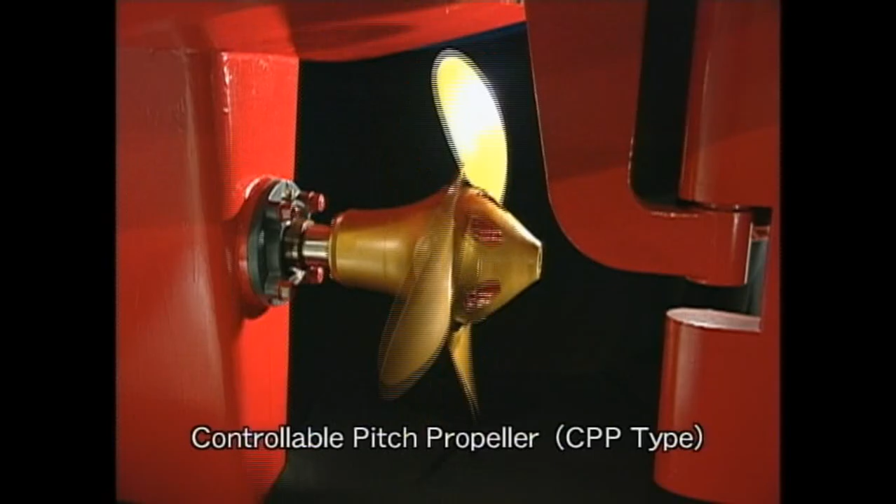Tugs are classified by propulsion type as follows: Voith-Schneider propeller (VSP type), controllable pitch propeller (CPP type), and azimuthing drive propeller (Z type).

In Japan, the azimuthing drive propeller type is the predominant tug. Such tugs are equipped with two steerable propulsion units that revolve 360 degrees. By controlling both the direction and revolutions of the propellers, tug assistance for ship handling is available in all directions and with varying thrust.

The use of tugs is decided in accordance with ship handling requests, such as to control a towed ship's speed, lateral motion, and yaw rate.

In pulling out operations, the tug's paid-out rope length is reckoned ranging from double to 2.5 times the tug's length, L. As the towed ship's size increases, still longer rope is used.

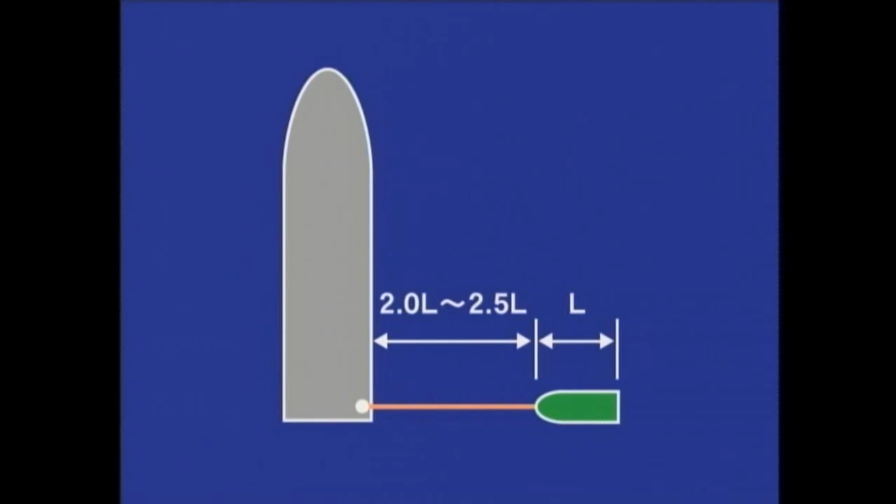This is the arrangement for assistance in lateral motion control by one tug. It is common to use this arrangement in combination with a bow thruster or with an anchor.

This is the arrangement for assistance in lateral motion control by two tugs.

This is the arrangement for assistance in pivoting motion control. In the tug operations, either the pushing or pulling method is used. The pulling method is needed for broad sea room. This method has the demerit of towing force decrease due to the impact of discharge current, but it has the merit of a flexible use of tugs.

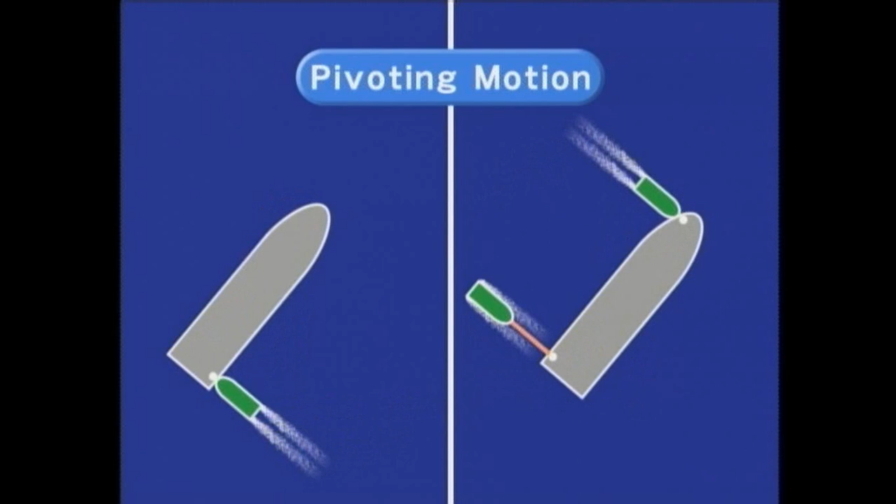When a tug tows the stern of a ship, the ship's pivot point will be aft of the bow, about 1/3 of the total length of the ship. When the bow is towed, the pivot point will be forward of the stern, about 1/3 of the ship's length.

As the point of action C exerted by the tug moves closer to the ship's centre of gravity G, the pivot point P moves farther from the centre of gravity G. Consequently, turning in a short round requires a circular manoeuvring area with a radius greater than GP plus half of L, with the turning centre at the pivot point P. That is, the farther the point of action from the centre of gravity, the smaller the turning radius.

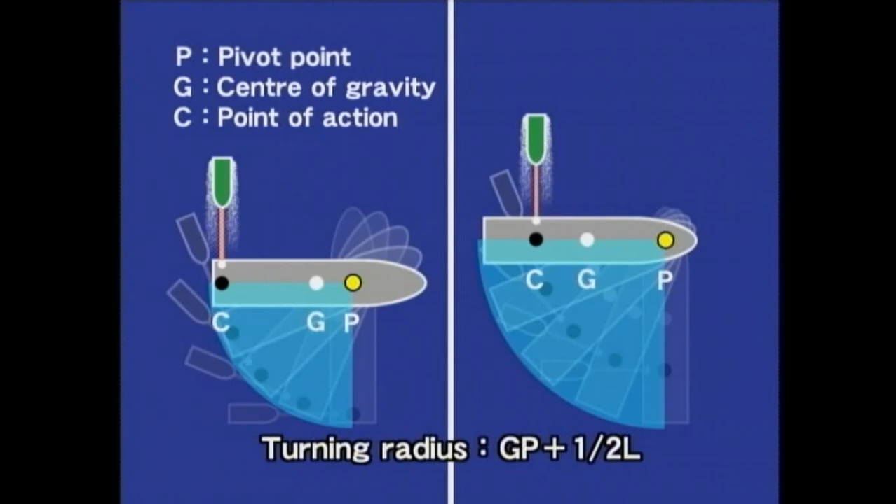A ship under 1 knot headway then makes a 90-degree turn with the assistance of a tug pushing either the bow or the stern of the ship.

It is known that pushing abeam the stern of a ship causes a relatively large kick-out. At the same time, however, it enables the ship to turn in a smaller manoeuvring area than if the ship were pushed abeam the bow.

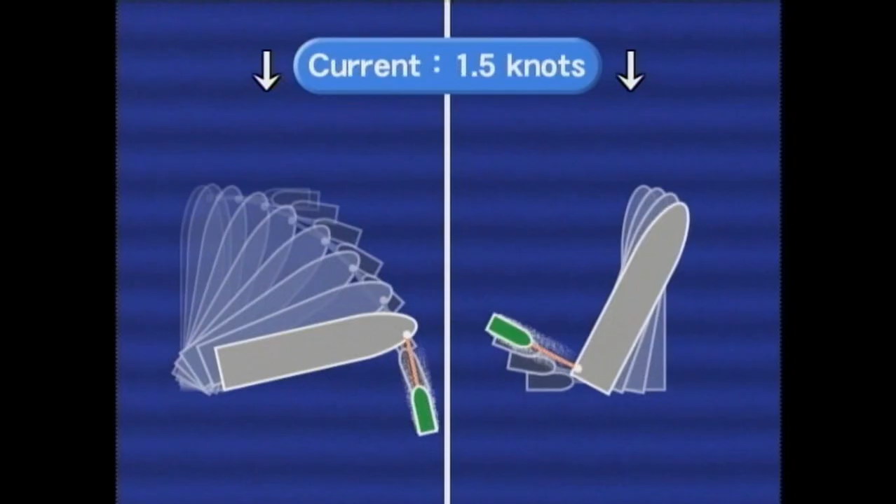When a tug assists the pivoting motions of a ship under strong wind and current conditions, the operation of towing the bow in the direction of the wind and current requires a broad manoeuvring area due to the ship's increased range of motion. On the other hand, the operation of towing the stern against the wind and current is effective for pivoting in a small area.

The ship will be in motion close to turning in a short round. Therefore, close attention should be paid to ship handling in manoeuvring areas with strong currents.

In the handling of berthing ships, it is very important to control the ship's approach velocity as well as directional control.

To prevent damage to the wharf and fenders, a large-size ship should reduce its headway to 0 somewhere at a distance of 1 ship length or ship breadth from the wharf, and then make a lateral move, berthing with the ship's heading kept parallel to the wharf.

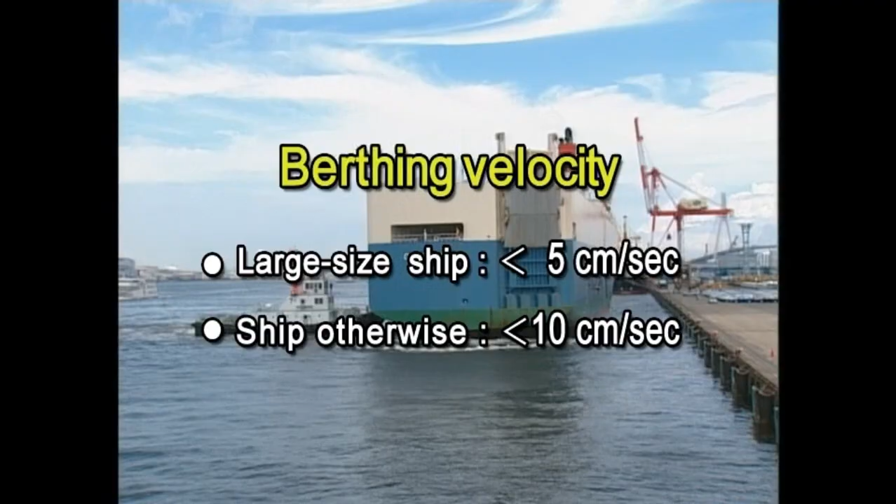The function of mooring lines is to control a ship's motions and make the ship fast to a fixed position. Head lines and stern lines are used to control surge, sway, and yaw. Spring lines function to control drift. Moreover, since it's desirable that each line be extended as far as possible, it is necessary that attention be paid from above during berthing operations to ensure these maximum lengths.

In cases of in-harbour ship handling accompanied by entering or leaving ports, ship handling without assistance is far from easy. In particular, the external force of wind and current has a great influence on keeping course and on changing course, on speed control, and on the directional control of ships. Taking the influence of external force into consideration, we are requested to implement berthing ship handling with the proper berthing approach angle and velocity, and to use assistance measures such as tugs and bow thrusters for ship handling.

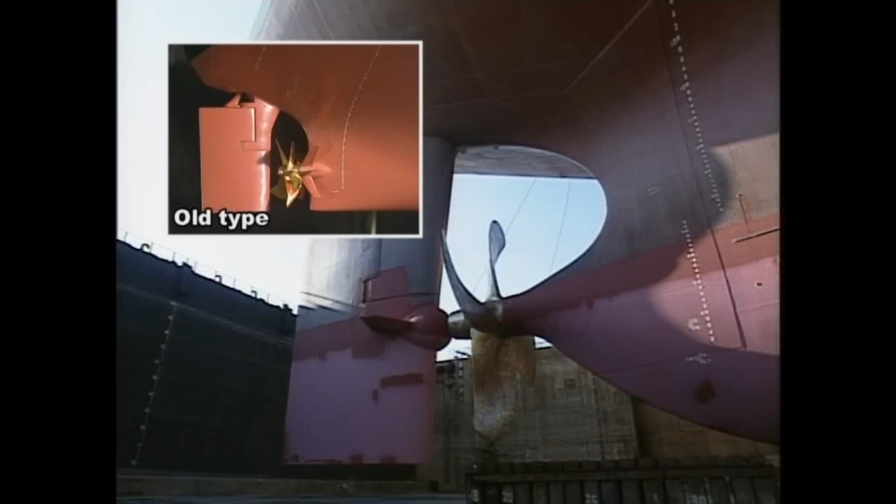When manoeuvring very large ships, as typified by VLCCs, ship operators are particularly required to grasp exactly the manoeuvrability of their own ships and to establish manoeuvring techniques more than ever, including speed control. To attain the above challenges, let us consider how to deal with the manoeuvrability of very large ships.

Good turning ability, stable course-keeping ability, and good initial turning and/or course-changing ability are required for ship manoeuvrability. But turning ability and course-keeping ability are of countervailing nature to each other.

Turning ability is characterized by the radius and the rate of turn on the orbital motion of steady turning phase, the former being normalized by the ship length, and the latter by the turning speed and/or ship length. The initial turning and/or course-changing ability, hereinafter called initial turning ability, is defined by the change of heading response to a rudder deflection and the yaw damping response when the rudder is deflected to midship. In other words, this ability indicates whether steerability is favorable or not.

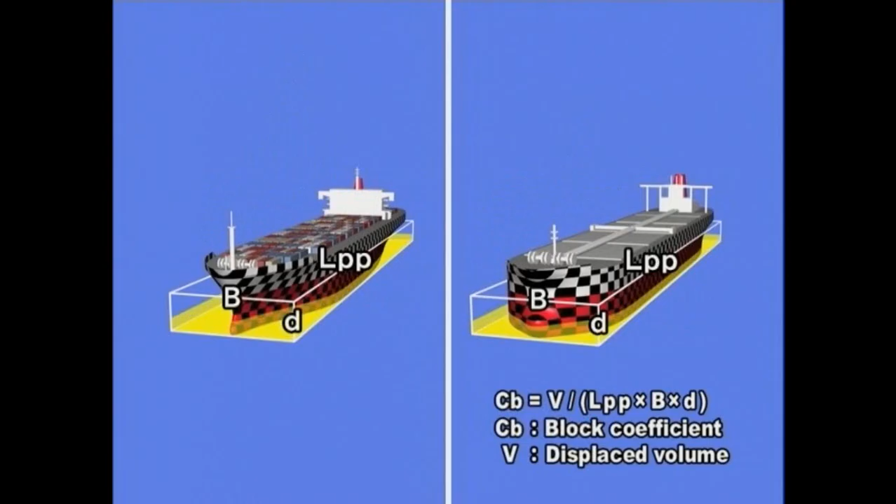Fine ships with small block coefficient, such as container ships, constitute characteristic features with good initial turning and course-keeping abilities, but with poor turning ability. On the other hand, fat ships with large block coefficient, such as tankers and bulk carriers, constitute characteristic features with good turning ability, but with poor initial turning and course-keeping abilities.

First, let us consider the turning ability. When the rudder is deflected and held at a fixed angle, the turning path of the ship's center of gravity is called the turning circle.

The advance is the distance of the ship's center of gravity along the original approach course from the start point of rudder deflection to the point where the ship has turned 90 degrees. The transfer is the distance from the original approach course to the ship's center of gravity when it has turned 90 degrees. The maximum advance is the maximum distance of the ship's center of gravity along the original approach course when the ship has turned a little more than 90 degrees.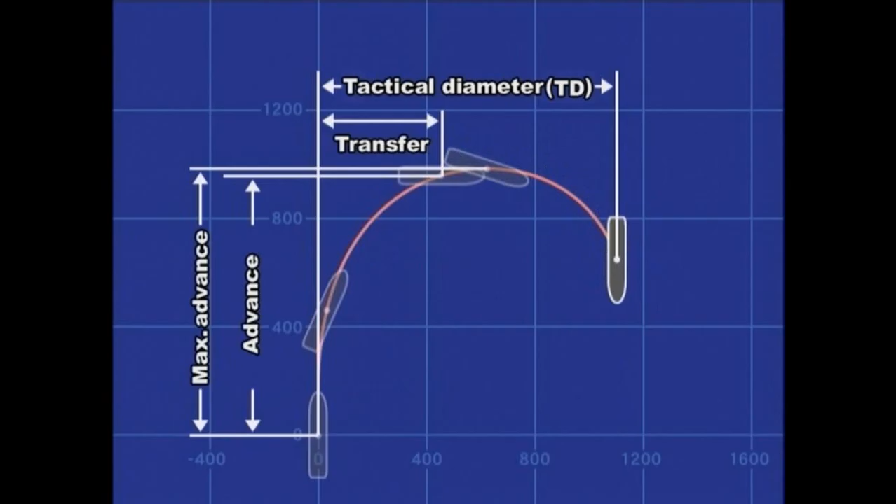The tactical diameter is the distance from the approach course to the ship's center of gravity when it has turned 180 degrees. The maximum transfer is the maximum distance of the ship's center of gravity from the original approach course. And the final diameter is the diameter of the ship's trajectory when it has settled down to the steady turning motion.

The reach is the distance along the original approach course from the origin of rudder deflection to the center of final diameter.

Immediately after the completion of rudder deflection, the ship's centre of gravity and aft terminal are kicked out. The kicked out amount on the centre of gravity is about 1% of the ship length, but that amount on the aft terminal occasionally reaches more than 15% of the ship's length.

The tactical diameter, TD, in a water area unaffected by water depth is shown in the figures, with the maximum 35-degree rudder angle. A fat ship, such as a tanker, has a tactical diameter of approximately 3 ship lengths, and that of a fine ship, such as a high-speed freighter, is approximately 4 ship lengths.

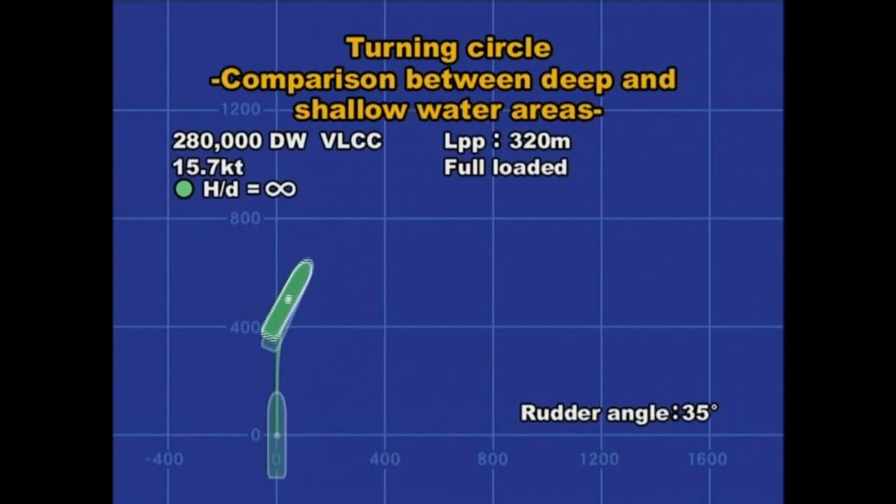Let us examine the influence of water depth on the turning circle, taking examples of a 280,000 deadweight ton tanker in full load condition. When turning in a shallow water area, the maximum advance increases approximately up to 1.4 times, and the tactical diameter up to 1.3 times, as compared to turning in deep water. Sufficient care should be taken for this when navigating in shallow water straits such as the Malacca Strait.

Let us examine the turning ability of a 280,000 deadweight ton tanker in ballast and in full load condition. When turning in full load condition, the maximum advance increases approximately up to 1.3 times, and the tactical diameter up to 1.2 times, as compared to turning in ballast condition.

VLCCs and bulk carriers should be given attention for the changes of turning circles, as they may extremely change their condition, such as draft and trim, dependent on full load or ballast condition.

When a rudder is deflected while a ship is advancing on a straight path, the ship begins to turn slowly at first, then increasing its turning rate gradually, and finally turns steadily with constant turning speed and turning rate.

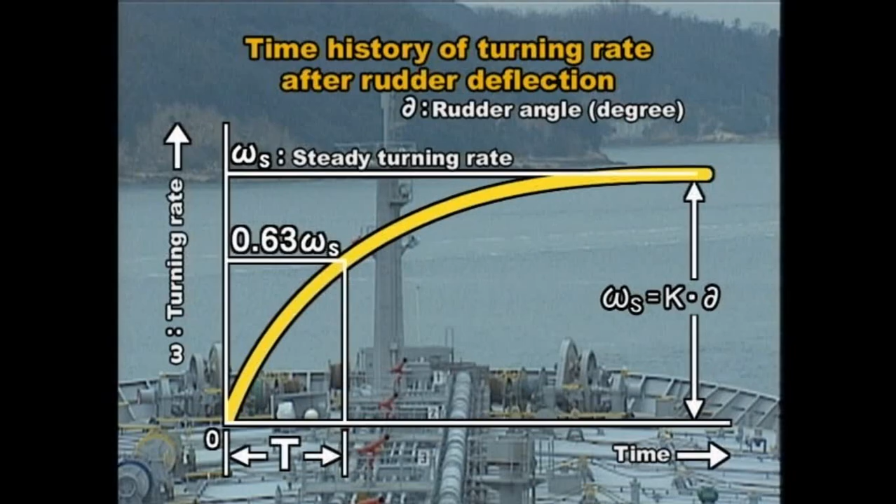The control of a very large ship will become increasingly difficult when a turning rate has been fully developed with a large amount of rudder deflection. It is important to control the turning rate appropriately by putting over the rudder bit by bit.

There is an example of providing an indication of turning rate control where the turning rate should be controlled within 10 degrees per minute for 10 degrees rudder deflection, or controlled within 20 degrees per minute for 20 degrees rudder deflection.

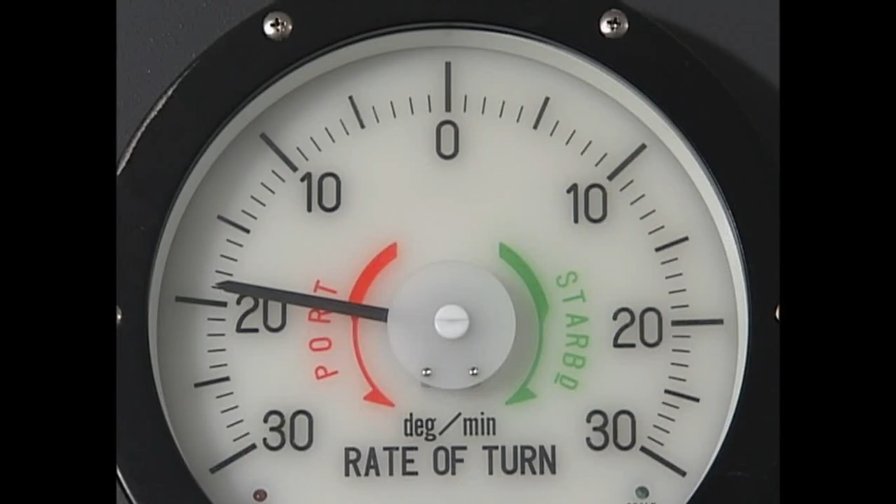Let us consider a case where a ship is changing its course. Due to the turning lag, it is unable to bring the ship onto the intended course-changing path if the rudder is put over when the ship has reached the course-changing point. When changing course, the rudder should be put over before reaching the course-changing point, taking the turning lag into account.

The course-changing distance is the distance along the original approach course from the start position of rudder deflection to the course-changing point. The relation between the course-changing distance and the course-changing angle is expressed as shown in the figure.

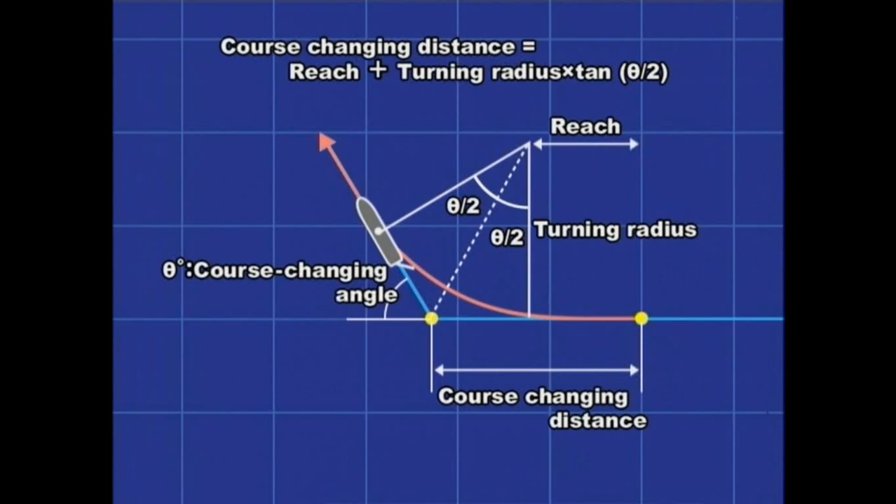Ship operators are required to acknowledge the elements of turning ability of their own ships, such as the amount of reach, the kicked-out amount on the stern, and the course-changing distance.

The following are simulated cases when two full-load 280,000 deadweight ton tankers are meeting on reciprocal courses. In spite of each taking collision avoidance action by hard over helm to starboard, the collision was unavoidable, resulting in contact with each stern. In this case, each had commenced the initial evasive action at a bridge-to-bridge distance of approximately 0.8 nautical miles.

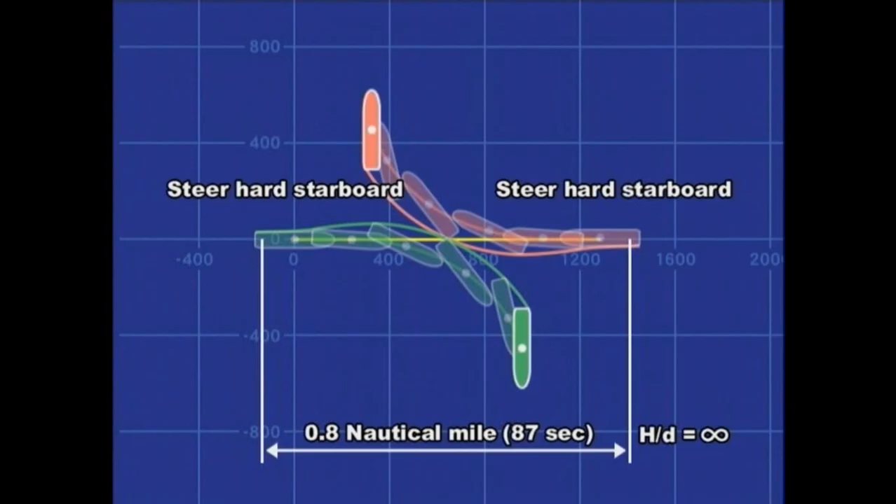When approaching a berth with excessive speed, an order for full astern is required for stopping the ship. During the maneuver, the discharge flow of the backing propeller from the lower part impinges strongly on the stern plating on the starboard side, which tends to move the stern to port. Eventually, the ship's head turns to starboard, and it will become harder to keep directional control.

In accordance with the Standards for Safety Management System, or SMS, the following precautions are required for decelerating maneuvers approaching a berth in harbour or an anchorage outside harbour. The ship's speed should be reduced gradually so as to be suited to the remaining distance. The ship should not overrun the target place, and the ship should be brought to stop with directional control being kept stable.

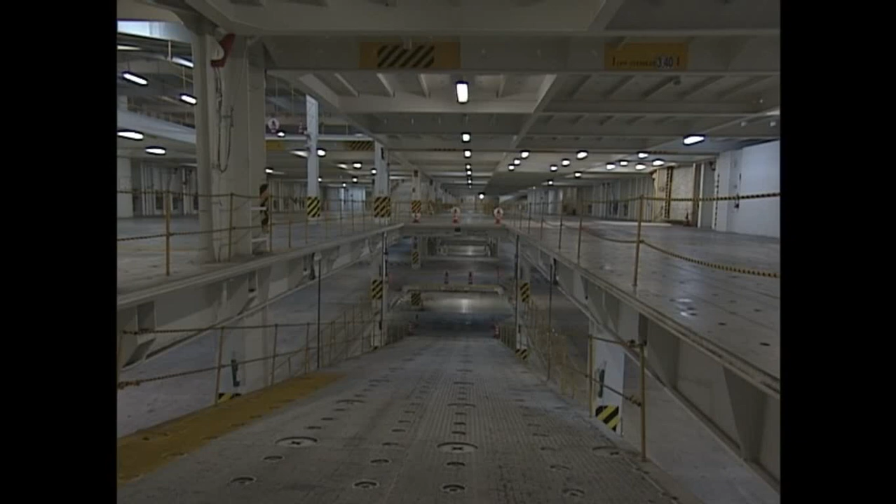To carry as many cars as possible, the PCC is designed as a rectangular type hull structure with high freeboard, having an enormous area of hull and superstructure as compared to that of the underwater hull.

Since the hull form of PCCs is quite different from that of tankers and container ships, PCCs are highly susceptible to wind effects at any time, whether in loaded or ballast condition.

Let us start with the area that is susceptible to wind effect. The wind-affected area varies with the change of draft.

The projection of above water on the midship section of a full-sized PCC in recent years has a value ranging approximately from 950 square metres to 1,050 square metres, and that on the lateral plane of symmetry from 5,500 square metres to 6,200 square metres.

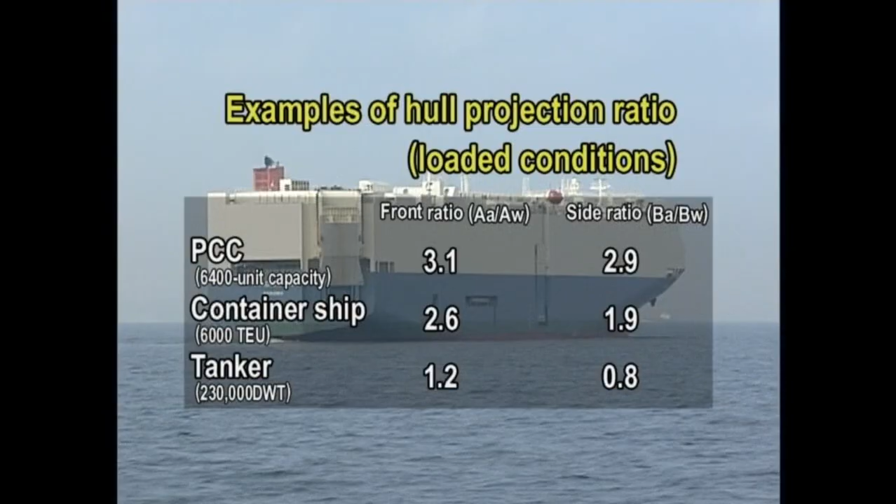Let's compare the ratio of the projected area of the above-water portion to that of the underwater portion by ship type. Three model ships, each in loaded condition, are compared with the ratio of the front projection of above-water portion AA to that of underwater portion AW, and the ratio of side projection of above-water portion BA to that of underwater portion BW.

The wind effect on the PCC is about 1.2 times on the front view and 1.5 times on the side view, respectively, as compared to that on a container ship.

It is also known from the table that the wind effect on the PCC is about 2.6 times on the front view and 3.6 times on the side view, respectively, as compared to that on a tanker. So the PCC is highly susceptible to the effects of wind.

Next, the resultant wind force is examined, as it has great influence on the maneuverability of a PCC. The wind force acting on each portion of the hull differs according to the shape of the hull and the wind direction. However, ship operators on the bridge deal with each local force as integrated.

In other words, this unified force is termed the resultant wind force acting on the working point. The working point of the resultant wind force is located at a distance A from the bow and moves with wind direction.

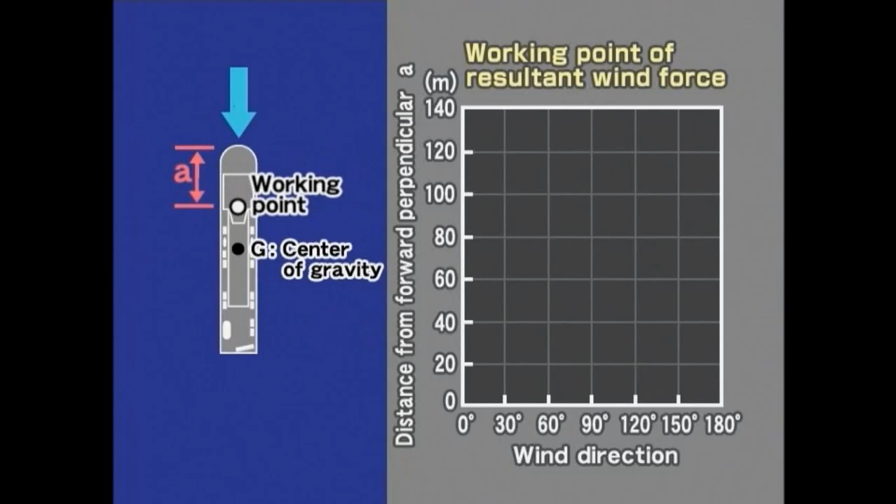When the relative wind direction is in the direction of the bow, the working point is at the position nearest the bow, moving abaft as the angle of relative wind direction off the bow increases.

The resultant wind force acting on the working point varies with wind speed and direction, reaching a maximum when the beam wind is acting on the largest wind-affected area. In the case of a PCC, it can reach 290 tons under a wind speed of 25 meters per second and a relative wind direction of 90 degrees.

Now let us examine leeway. Needless to say, as the ship is being drifted to leeward, little by little deviating from its planned course line, it is required to steer a little more to windward than the planned course in anticipation of leeway.

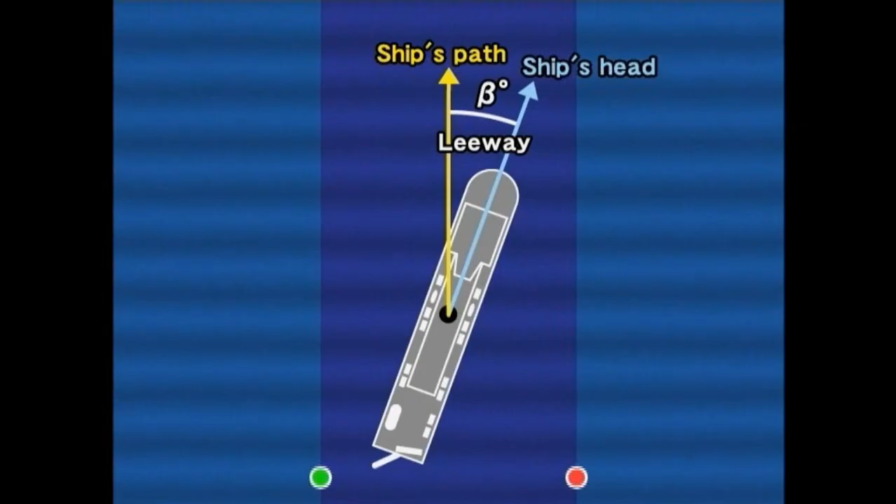Due to the above, when navigating a narrow channel whose width is confined under the influence of wind and tidal current, prudent ship handling is required in consideration of leeway. For this purpose, the ship is required to take a little more windward course than the planned course in order to remain on the planned course line.

Now let's examine the turning of a PCC under a strong wind. As shown in these figures, the turning of the PCC is greatly influenced by wind.

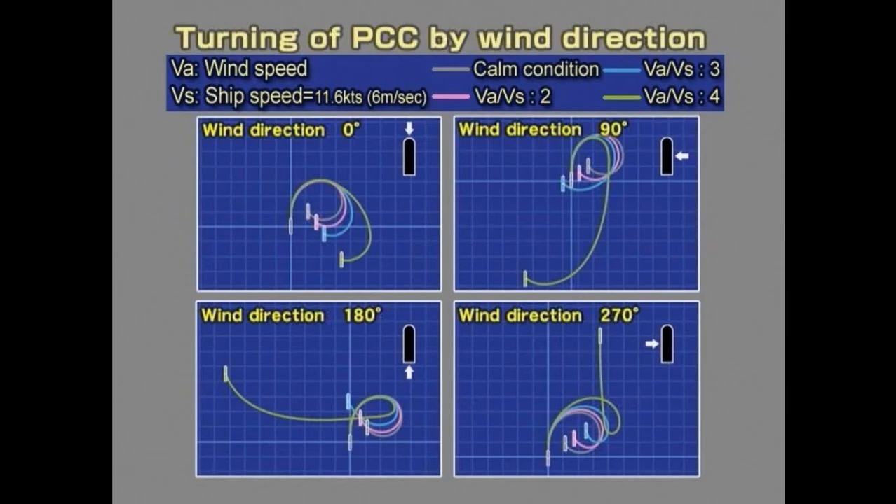Due to the above, as the VA and VS ratio develops into 4, there are instances where the ship can be led to the region of uncontrollability depending on the relative wind direction, and some PCCs have extreme difficulties for turning maneuvers. For the above reason, it is necessary to grasp the maneuverability limit of one's own ship.

A ship at anchor will swing around the anchored position in the wind, moving as if to draw a figure 8.

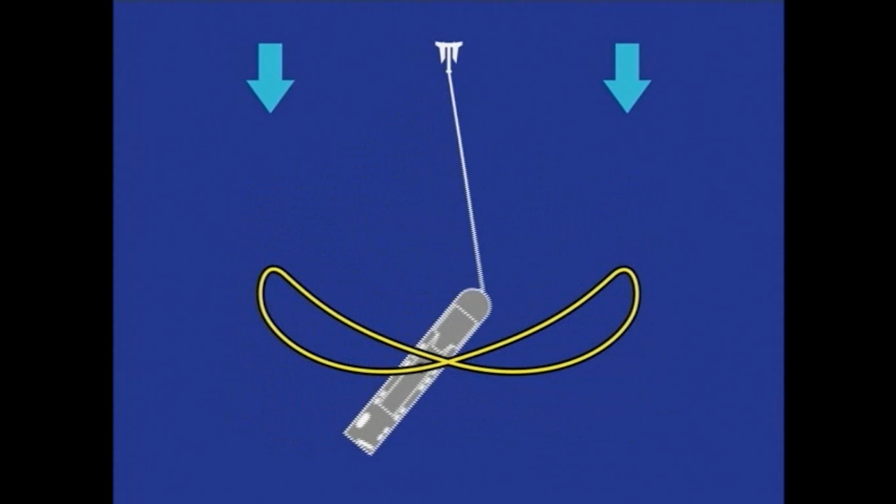First, the ship begins to be swept away backwards subsequent to its heading on the wind at the extreme end of the windward turning. Then, due to the backward motion and the turning moment on the leeward with the heading nearly unaltered, the cable tension greatly increases due to tension by wind force, and that by inertia force by the ship's accelerated motion.

But the wind force increases to about 52 tons with that of 30 degrees off bow. Thus, it is shown that the wind force acting on the hull grows much greater as the angle of relative wind direction off bow increases.

According to on-site reports from masters, when the ship is riding to a single anchor, the maximum angle of relative wind direction in degrees under swing motion is reckoned empirically as approximately double the wind speed in meters per second.

The safe measure for preventing dragging anchor is how to control the swing motion of a ship while a full length of cable is paid out for the increase of its holding power.

To control the swing motion, a swing check anchor is used with another anchor lowering to some 1.5 depths of water on its cable. This method can reduce the magnitude of swing motion on the order of about 50%.